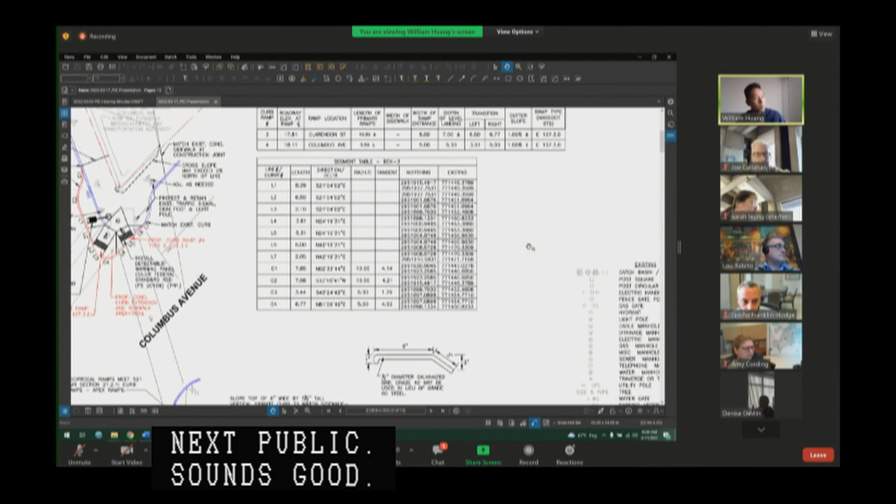Okay, so Freeman Street at Fields Corner Busway. Bear with me as I separate these two out. There we go. Okay, so this is the latest PIC plan. As a reminder, we are working on 3 of the 4 corners of the intersection. We are building a curb extension on the east side of the intersection, and we are redoing the curb ramps on the south and the west side. Here's a quick rendering of what it will look like.

Okay, so here's the curb extension that we're building out. We're splitting the apex ramp into 2 directional ramps. We're moving this post out of the path of travel way, and then shifting the lighting to expand the width of the path of travel as well.

On the other corner, we're adding a bollard here to prevent or deter vehicles, specifically SU units, from making that left turn onto the busway. The post that dictates an accessible path north of the intersection will be relocated just adjacent to this building. We're also adding a stop sign, a do not enter sign, and a no left turn sign on this approach.

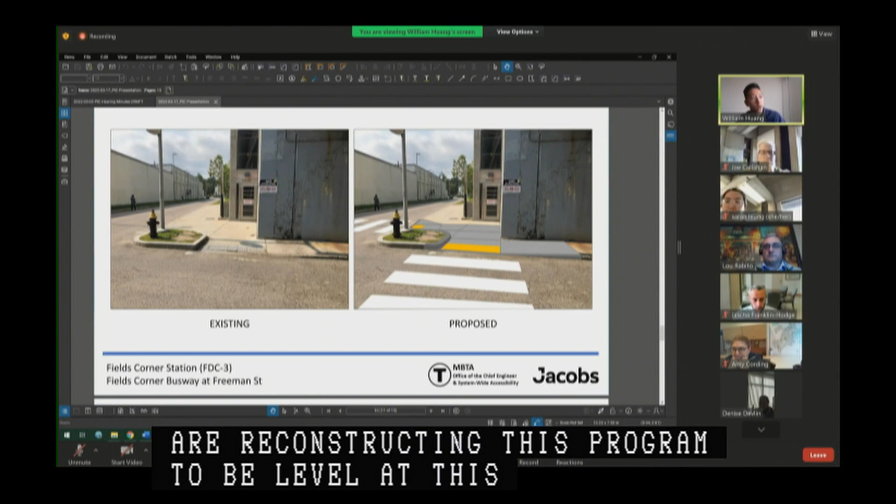Here we're reconstructing this curb ramp to be level at this portion. It's not shown in this diagram, but we're also adding, I believe, a no left turn sign here because of the concern that this island will be a tripping hazard.

So I'm just going to backtrack to the plans again. Comments received from the last meeting were to add a dimension line for the roadway width. So here we added 14 feet, and the curb extension is 6 feet from the existing curb line.

Another question was regarding whether there could be a signpost here as opposed to a bollard, and we explored that option. However, because of the width of the signs and how close it is to the curb line, we're afraid vehicles might interfere with the sign, and it might hit vehicles passing by. So we're going to have to stick with the bollard at the corner.

The other portion was adding a sign in this island, and we're proposing the R5 sign, which is the no left turn sign. Finally, the last comment was regarding raised crossings. We looked into raising the crossings; however, due to the nature of this project as an accessibility project, and impacts to drainage and buses traversing over raised crossings, we decided it would not be the best solution for this issue we're trying to solve.

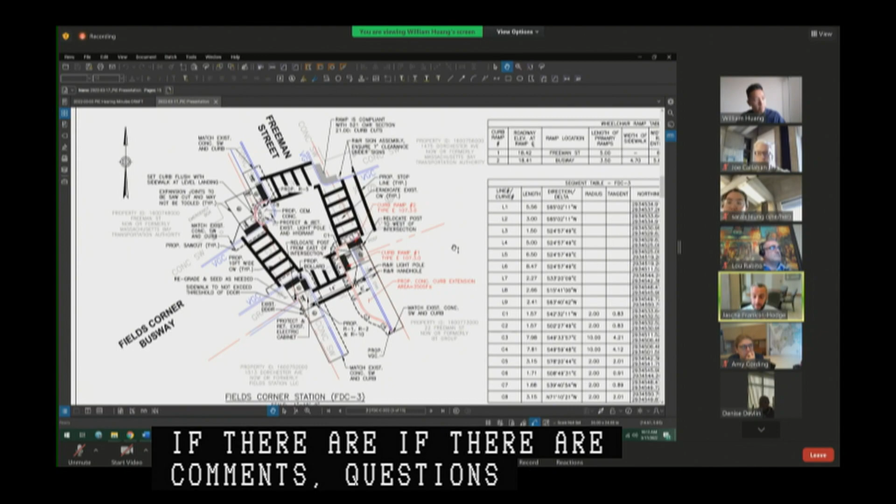Hearing none, any comments or questions from PIC staff or members of the public? Just hoping that the T will confirm that they will maintain that bollard if ever needed in the future.

Can we get an answer to that from somebody from the MBTA? We'll have to look into that. We're replacing in kind with compliant curb cuts, and the bollard was at the request of the city. Okay, we can discuss that offline, I guess.

Okay, Todd, I believe there's a comment in the chat box. Mr. Kirkpatrick asked if questions are entertained from the public. The answer is yes, and now if you are interested in speaking on this particular matter, now would be the time. For any matter that is either new business or a public hearing, there will be an opportunity for the public to speak, unless it is continued as we did with some of the earlier items. So we are open for comment on this matter at this time from the public.

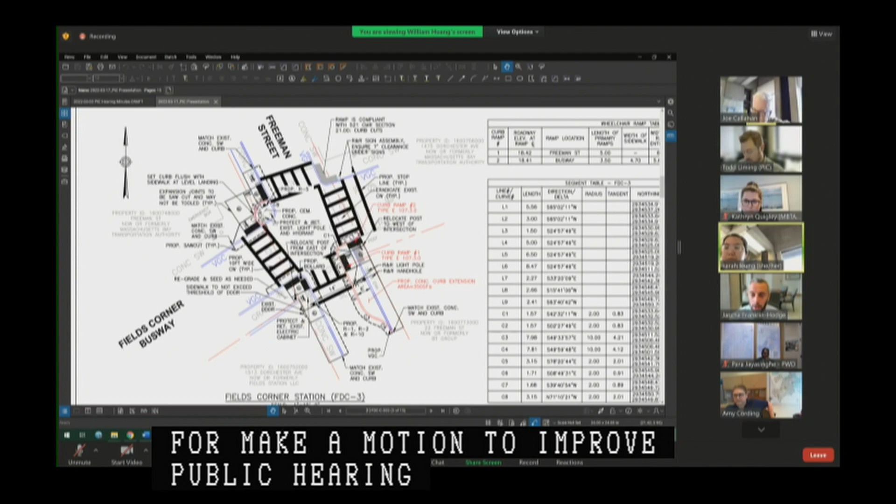All right, hearing no further comments, I hear a motion to approve public hearing number 4? I'll make a motion to approve public hearing item number 4 as read into record by the chair. Second. All in favor? Aye. Aye. Any opposed or abstain?

So moved. Moving on to public hearing number 5 on a petition by the Massachusetts Bay Transportation Authority for the making of specific repairs within the following roadways in Boston proper, consisting of curb realignment, sidewalk reconstruction, as well as new and relocated pedestrian ramps and traffic signal infrastructure. Clarendon Street at its intersection with Columbus Avenue at its intersection with Clarendon Street.

So it's new business from our March 3rd, 2022 hearing, and is shown on a plan entitled City of Boston Public Works Department, Engineering Division, Specific Repair Plan, Clarendon Street at Columbus Ave, South End, one sheet dated March 2022. Would the presenters please introduce themselves again and state their affiliations, provide a brief overview of the project, and specifically report back on any outstanding questions or revisions resulting from the new business hearing.

Thank you again, Lou Rabito, Jacobs Engineering Group, representing the MBTA. Kathryn Quigley, SWA, MBTA. And William Huang from Jacobs, representing MBTA.

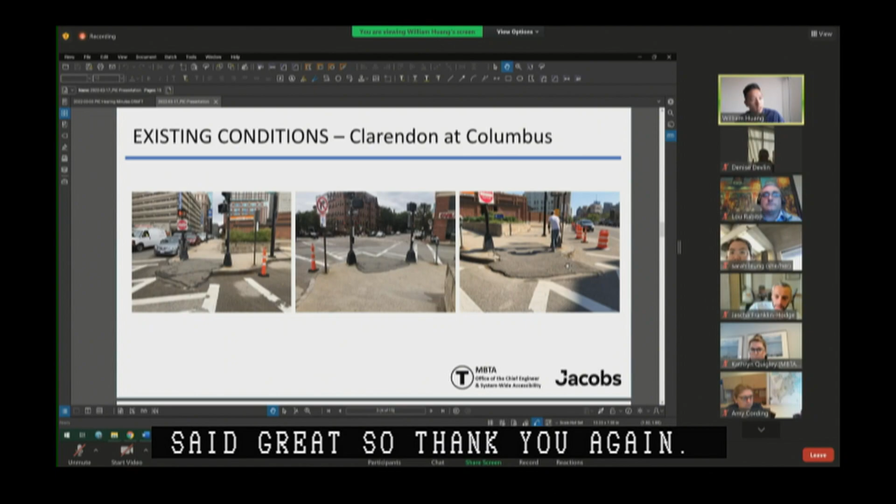Great, so thank you again. So for Clarendon and Columbus, just going to continue off the previous one. Here's an existing look at what Clarendon Columbus looks like. This is the north corner, northeast corner of the intersection.

Our proposal shown here is to split off the apex ramp into directional ramps as well as add a curb extension. This results in the removal of one parking meter. However, it increases the safety of this corner as well as the compliance with accessibility guidelines tremendously. In talking with BTD Signals, they would like a video detector after replacing the post, one of the pedestrian posts. So here is what the corner is proposed to look like. The detectable warning panels are red per Landmarks District requirements because this is in the South End Landmarks District.

So with this, I'm going to go back to the latest PIC plans. The comments received from the previous hearing were to confirm whether or not the reciprocal ramps were compliant, and they are compliant, and we have documentation of that if needed. The project will also confirm that MBTA handles snow removal from the subject corner. Yes, MBTA is coordinating snow removal at this location. Curb realignment should not negatively impact any future Columbus Ave bike plans, and we do not anticipate any impacts to future Columbus Ave bike plans. MassDOT is aware of the plans. I think that's it for all the comments.

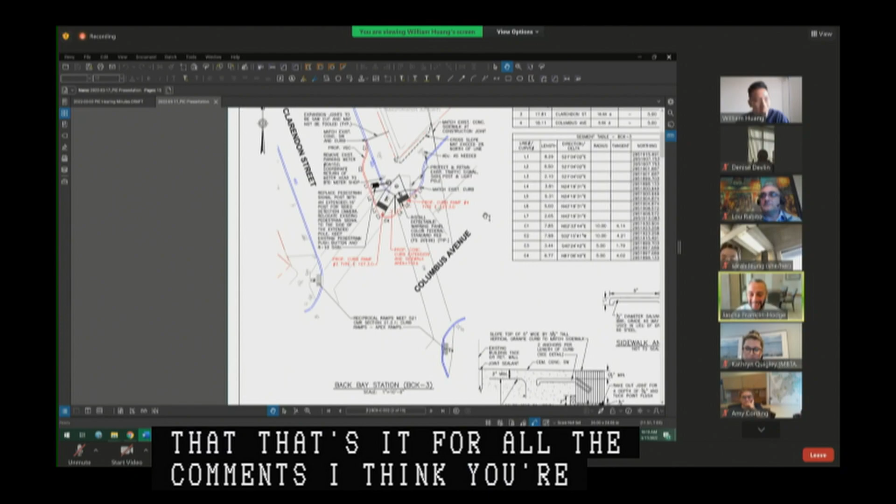Excellent, thank you, any further? Yep, thank you. Thank you very much. And any comments or questions from the commission? Any comments or questions from PIC staff or members of the public? No, though I will ask the public to use the raise hand feature at the bottom of their screen should they choose to or wish to add testimony to any particular hearing.

All right, do I hear a motion to approve public hearing number 5? Make a motion to approve a petition by the Massachusetts Bay Transportation Authority for the making of specific repairs in Clarendon Street and Columbus Ave, as read into the record by the chair. Second. All in favor? Aye. Aye. Any opposed or abstain? So moved. Excellent, thank you very much.

Moving on to our new business for the day. So our first order of new business.

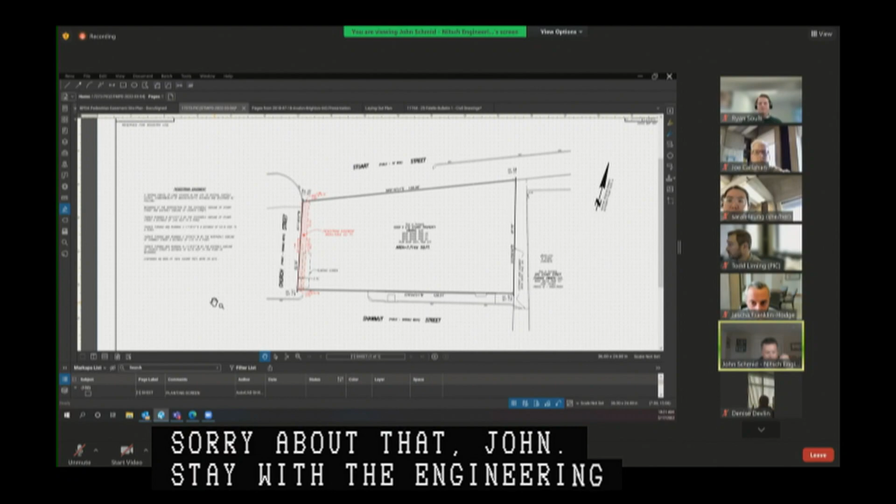Before you is the pedestrian easement plan. The pedestrian easement is approximately 3.75 feet wide and extends approximately 53 feet long, the length of the property line. The intent is to allow the public access up to the building front and improve the whole pedestrian experience within the plaza area itself. The plan has been reviewed and blessed by all the city agencies, including disabilities.

Excellent, thank you very much. Do we have any questions or comments from members of the commission? Any comments or questions from PIC staff or the public? None. All right, don't see any raised hands, so hearing no comments or questions...

Are you prepared to come back for a public hearing in 2 weeks on the 31st? We look forward to it. Excellent, we will see you in 2 weeks. All right, thank you. Thank you very much.

Moving on to new business item number 2, Nevins Hill Way at 25 Fidelis Way, Brighton, a layout approval on a joint petition by New Boston Ventures LLC, DBA 143 Washington LLC, Avalon Bay Communities Inc., DBA Brighton Avalon LLC, and the Boston Housing Authority. Will the petitioners please introduce themselves, their affiliations, and walk us through the proposal?

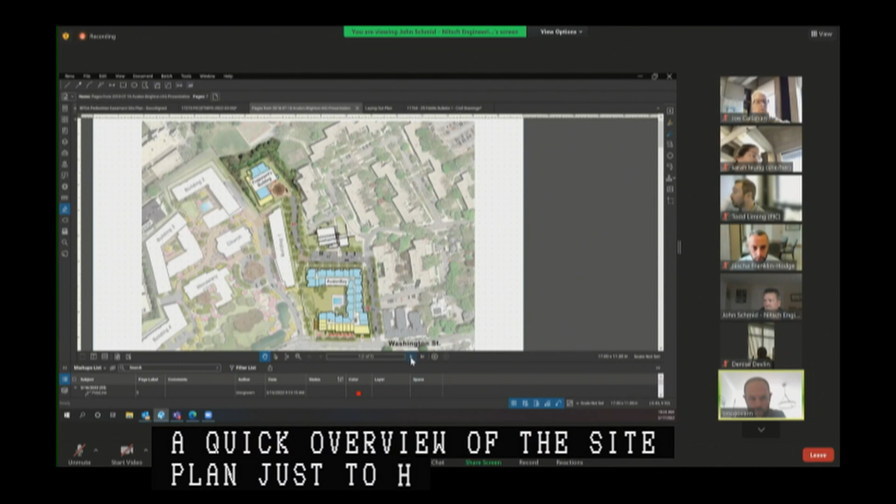So on the screen here, I'll just walk you through it. I thought it'd be helpful to do a quick overview of the site plan, just to help provide context for the private way. This project was originally permitted as 139 to 149 Washington Street, and it consisted of 2 separate buildings. You can see the one in the front is Avalon Bay, and then there's one in the rear up on a hill that's labeled Proponent's Building.

The front building is facing on Washington Street, and the garage to that building is accessible off Fidelis Way. The rear building is accessible by traveling up Fidelis Way and going across the Boston Housing Authority property, which is an existing parking lot that we're expanding, and then going up the drive aisle to our building. John, if you want to go to the next page.

This is just a color-coded version of that. So in orange is Fidelis Way, which is a private way. And in yellow is the property owned by the Boston Housing Authority, and the purple is where that property line is to our building and the drive aisle. If you want to go to the next one, John.

We have an easement agreement in place that's shown in red that allows for us to travel along Fidelis Way. You see the boundary of the easement stops where we make that left-hand turn into the parking lot area. The reason for this private way is that when we were seeking a building permit with ISD, we were given the address of 25 Fidelis Way for our rear building, because that is where the vehicular access comes off of on Fidelis Way.

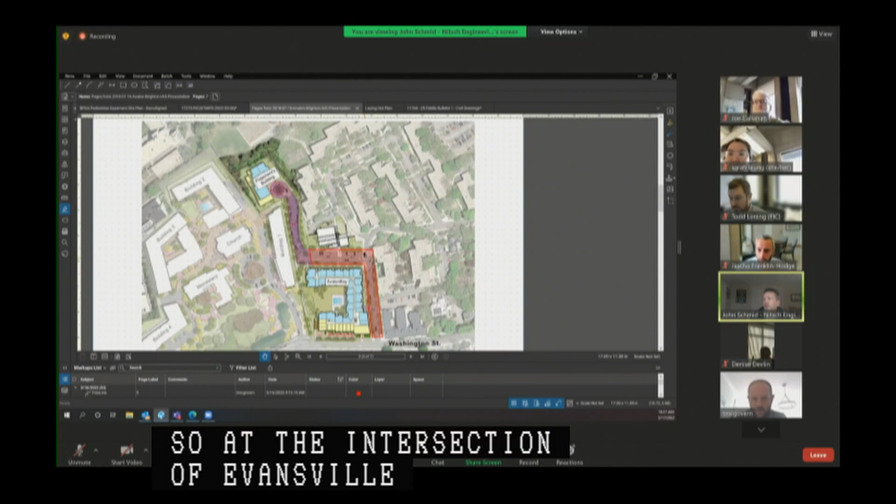So I'll turn it over to John to go through the plan in more detail. At the intersection of Nevins Hill Way we have a tabletop crosswalk. As vehicles come through this section, the right-of-way is approximately 61 feet wide. We're providing 6.5-foot concrete sidewalks on both sides of the roadway, 7-foot wide parallel parking along this section, and we're maintaining the 18-foot perpendicular parking spaces currently used by and dedicated to the Boston Housing Authority.

As we take this turn, we have a crosswalk so pedestrians can walk this way, and another crosswalk here. As we come up the hill at this bend, it provides a 25-foot wide traveled way, and then as we pull up to this section, we have a 21-foot wide travel way. On the left side we have a 6-foot wide concrete sidewalk, 7-foot wide parallel parking, a 21-foot path of travel, and a 7-foot wide parking area with a 5-foot wide sidewalk. At the top, we have a raised crosswalk so pedestrians walking up this side can cross the raised tabletop crosswalk, and from there go through the plaza into the building.

And here's the actual drawing. So we have the tabletop here, vehicles can come in, perpendicular parking dedicated to Boston Housing Authority, and parallel spaces down here. As we take this bend, we have this crosswalk, and as we come up towards the building itself, we have two-way travel with a 20-foot wide travel way, 7 feet of parallel parking on both sides, and a 5-foot sidewalk to the right and a 6-foot sidewalk to the left. The sidewalk here comes up to this point.

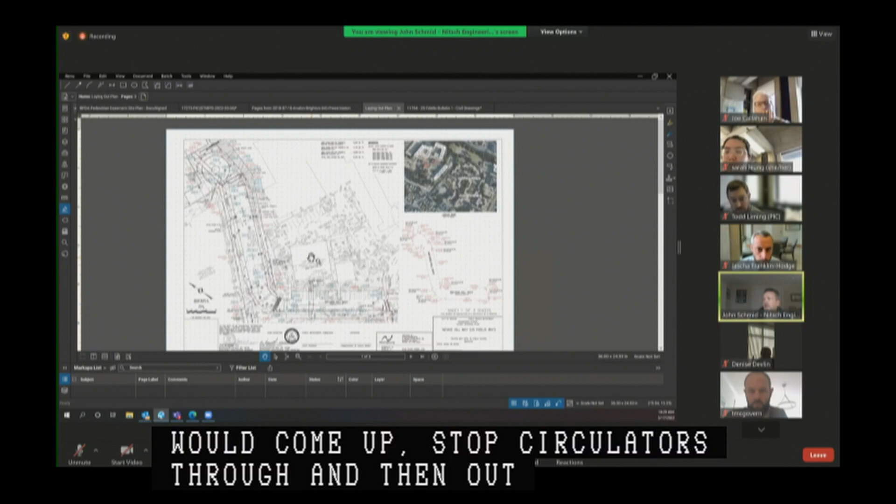I know that Sarah hasn't had an opportunity to review these in any great detail. So Sarah, any comments you'd like to share, we're available anytime to review them with you.

Great, thank you very much. Are there any questions, comments from members of the commission? Thank you, John, and thank you for the project update as well for this project.

Is there any feasibility on expanding the width of the sidewalks? I think 5 feet and 6, 6.5 feet are really at the minimum of our standards, and with the addition of possible signage it can get a little tight for the pedestrian path. So is there any opportunity to expand the sidewalks to our city standard of 7 feet?

Unfortunately, there is not. It is extremely tight up here, as you can see we're really fighting grade here. We actually end up with a small retaining curb to allow it to be functional. This is a private way, and the sidewalk itself will be concrete. There will be no tree pits and no obstructions within the sidewalk itself.

And down here, where we possibly have signage, we'd have bump outs that the signage would be allowed to be put on — for instance, we have a stop sign down here that's on the bump out itself. So we spent a lot of time trying to explore wider sidewalks, and it just wasn't feasible for this project without great cost to the project. Don, can you add a comment regarding the street lighting component of this equation?

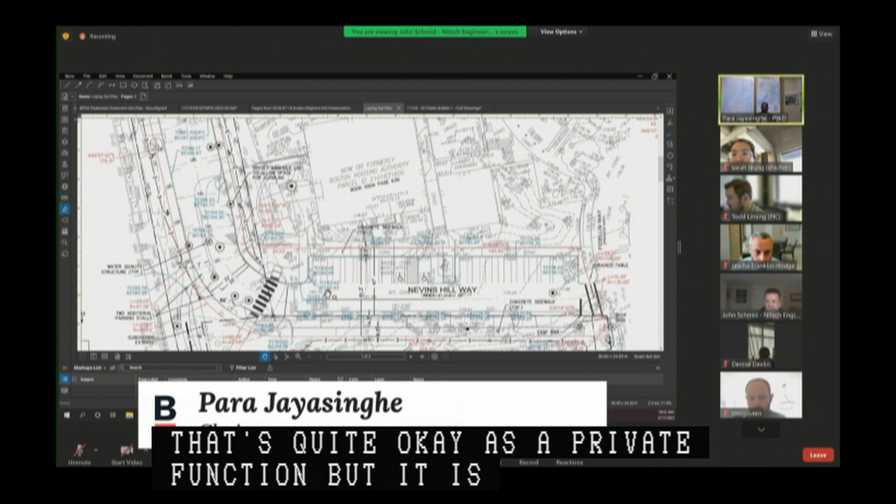Second point, John, as you know, the dedicated parking spots that are there - that's quite okay as a private way function, but it is not at all compatible with the public street. So I'm going to assume that all parties, including the Corporation Counsel or the Counsel for BHA, recognize that this street will not be in a future petition to be turned into a public street, as long as that is known at this point to all parties. You follow what I'm saying, right? Because this is unconventional, and it's only here because it's an existing condition. And with this constraint, we understand that this street would never be proposed as a public way.

So that little bit of language needs to be codified somewhere when we record these plans in the Registry of Deeds, okay? We'll include that language in the PIC order. Also, these guys will do snow removal, right? I don't think we're coming up here to plow around this thing, and particularly not to plow in the BHA parking spaces. So from Fidelis up to the end, you guys should take on the snow. Understood, private way will be the maintenance responsibility of the developer.

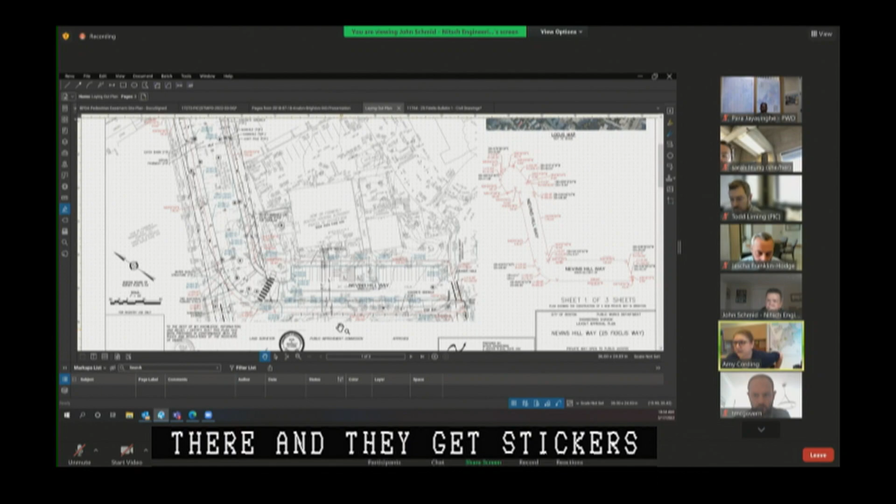Can I also say something? I don't know if you can hear me. Yes, hi, this is Dean Papadimitra, I'm counsel to the Boston Housing Authority. I do just want to mention about those parking spaces - this is a private way, so our understanding is that the general public is not allowed to park on those parking spaces, and only BHA residents can. So as a private way, this can be signed, but it is then enforced by whomever is the owner. So if there's people parking there, they get stickers, and there's a towing company, that's all organized privately. BTD will not enforce these parking spaces at all, so you can regulate them how you see fit, but you also then enforce them per your own regulation. That's correct, yeah, that is correct.

What I also like to note, and we'll have this on the final drawing, is that we will provide a street sign that says Nevins Way, Private Way, Nevins Hill Way, Private Way, so it's clear to anyone entering the parcel that it's a private way and not Boston Public Works responsibility.

Excellent, any additional questions or comments from the commission? I guess what level of vehicle can we turn around up here, like what would get stuck? So the fire department has reviewed this when we went through the ISD permitting process. For moving trucks, the idea would be your largest truck, a box truck would come in, park here, and then we could unload, and it would do the 3-point turn to get out. Smaller vehicles have the capacity to go around the circle.

John, not the private utilities like gas and electric, but the sewer lines and water lines, have you had conclusive conversations with Ms. Devlin's team to understand who owns them, who maintains them, all of that? Yeah, I received an email from Denise that she was okay with this. We have full site plan approval for both this project and the Avalon project before it, and there are cross easements between both parties for the utilities - water, sewer, storm, electrical, gas.

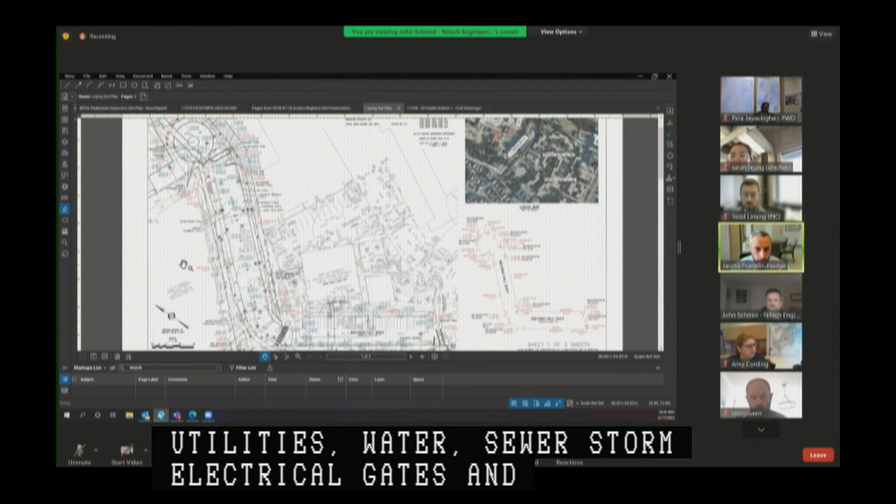Thank you. Any additional comments from members of the commission? Any comments from PIC staff or members of the public? No, none. Is 2 weeks enough time to address what you've heard today and come back for your public hearing? Yes, we believe we'll be ready. And Sarah, we're happy to reach out and communicate - if you have any additional comments you'd like to share, please do so, and we'll incorporate them as best we can. Excellent, thank you very much, we will see you on March 31st.

Moving on to new business 3: 3353 Washington Street, Green Street, Jamaica Plain, pedestrian easement on petition by 3353 Washington Development LLC. Would petitioners please introduce themselves, their affiliations, and what is proposed? Sure, good morning, my name is James Dowling from Howard Stein Hudson, we're project engineers. I'm also joined this morning by Maddy Blanchard from Howard Stein Hudson and by Hugh Miller from 3353 Washington Street LLC, who's the applicant.

We have prepared a couple of slides to give some project context before we get to the pedestrian easement. Next slide, please. The project's located at the intersection of Washington Street and Green Street in Jamaica Plain. Next slide please - a couple of viewports here from what you would see if you're on Washington Street. The project consists of 5 stories with 45 residential units, approximately 2,000 square feet of commercial ground floor space, with 24 off-street parking spaces. Next slide.

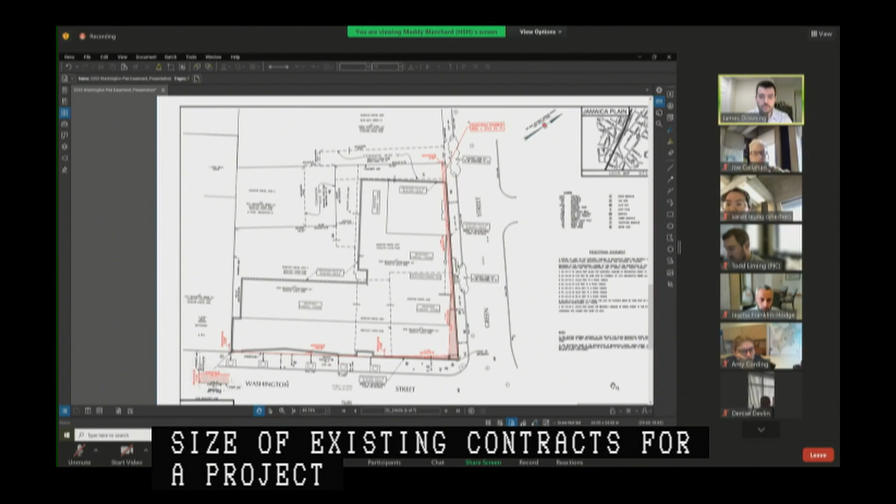Although a specific repair plan isn't required for the project, having reviewed the existing grades and elevations of the existing sidewalks, most, if not all, did not meet ADA compliance. Therefore, the applicant is willing to remove and reset all curbing and pour brand new sidewalks along Green Street and Washington Street. BPDA staff had also requested a reduction in the size of existing curb cuts for the project, which the applicant is also willing to do. And lastly, at the intersection of Green and Washington Street and Glen Road, there are 4 apex ramps that the applicant is also willing to remove and reconstruct to meet ADA compliance.

With that, happy to answer any questions that commission members or public may have.

To everything that you just said about the commitment for the ramps and all of that, while I know that can be done, potentially just by posting deposits and whatnot, when you break up those apex ramps, we've got a lot of stuff on these corners. So I think, if it's not on a specific repair plan, it probably still needs to be shown more than just through the permitting phase, the limits of your sidewalk reconstruction and how these ramps will be split.

Just to clarify, we're not splitting the apex ramps, we're just repouring them. In place? Correct. Okay. Is that okay with Sarah?

So that kind of brings me to the disabilities comments. I know we spoke to you during the comment period, but after internal discussion, I think the city has a lot of concern about pouring and replacing the apex ramps in place, given that this is a fairly large project of 45 units. There are going to be a lot of families here, as well as retail uses, and it's already an existing heavy pedestrian area and intersection. So I think more data on the cost and the constraints of replacing or splitting the ramps would be helpful for the Disabilities Commission to understand the constraints at this site.

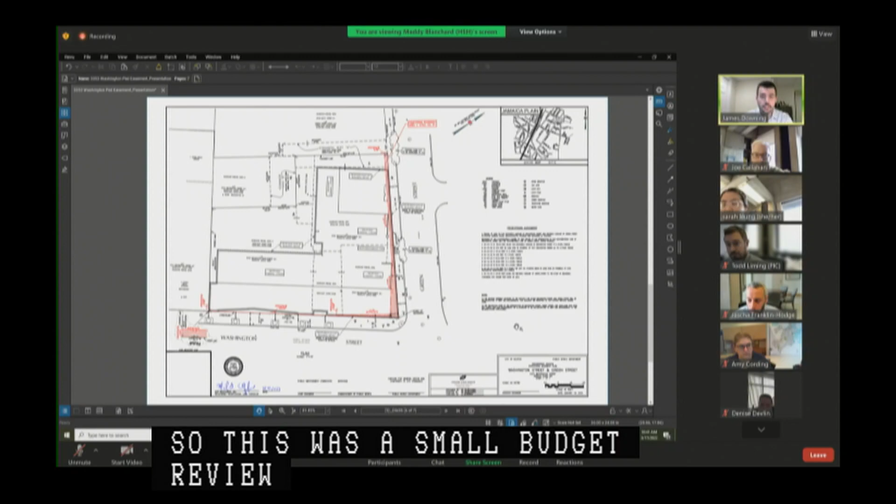Sure. So this was a small project review for the size of the building. We would have to relocate 6 signals out here, along with 2 existing bus stops, along with Boston Water and Sewer catch basin infrastructure and also fire control pull boxes. So it's a significant undertaking for a project of this size. But that said, we can certainly go and put some numbers to the costing for that, and we can meet again before we come back to PIC.

Yeah, that would be extremely helpful for our team to review, if we could just get a sketch and hard numbers to a cost estimate, as well as the overall value of the permit for the building, I think would be helpful for us to review as well, if that information is available. Okay, yep. I'm sure we can get that for you. Great, thank you.

Any additional questions from commissioners?

Any questions or comments from members of the public? I see none. Or any from PIC staff? Also none. All right, excellent.

Sorry James, are there any on-street or off-street parking associated with this project? There will be 24 off-street parking spaces provided within the building. Off-street, and the driveway is coming from? So at the top of the plan here, there's a shared parking driveway.

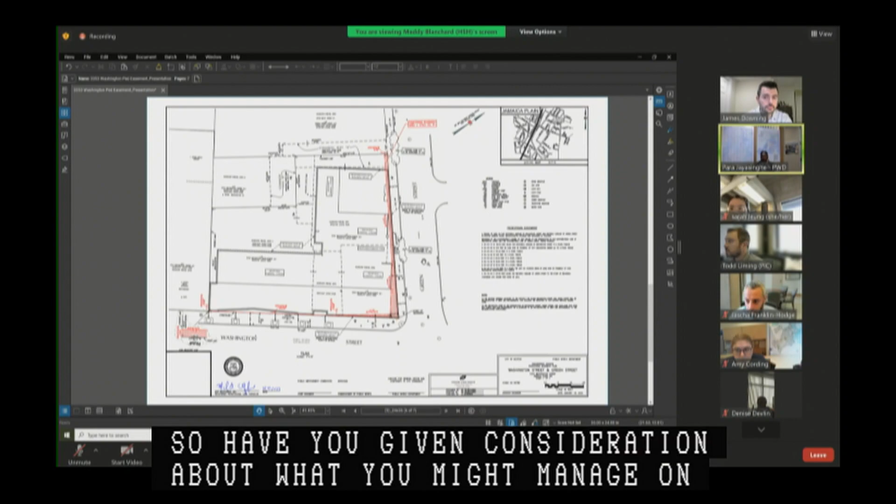So have you given consideration to how you might manage on-street parking? Because just up Green Street you've got the T station, and there's a huge desire line from a pedestrian perspective and movement of goods and services. I'm going to assume you've given it the appropriate level of thought to understand how to manage curbside regulations to service the ground floor commercial components you're anticipating.

They're reserved for police vehicles. There's a police station across the street. Amy, I didn't want to bring that up myself, so I was trying to insert it gently into the conversation so it doesn't become an awkward moment at some point in the future. Correct. Thank you.

I have a question about the driveway entrance at the top of the drawing. Currently there's a transition at the edge of that driveway from concrete to asphalt sidewalks. What is the planned final state once this is reconstructed and the driveway is rebuilt? Where will that line be between asphalt and concrete?

It'll be difficult for me to describe without showing you a plan. Right now it's a pretty large curb cut. We're going to potentially reduce that to 12 feet. Once we construct the curb return on the north side, there will be a section of probably at least one or two panels of concrete installed, and then it will transition back to HMA. Got it, okay.

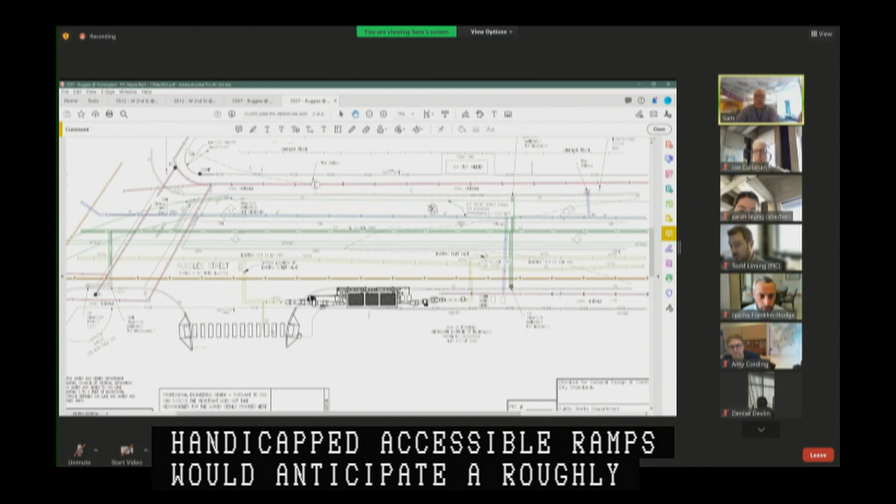As before you, you can see it's a 3-vault system with a pole-mounted regulator box and 2 vent poles, all of which will be replaced in the existing locations. In addition, National Grid is going to upgrade the existing sidewalk at the entrance to Wentworth Institute with the appropriate pedestrian and handicapped accessible ramps. We'd anticipate a roughly 8-week construction cycle if the commission were to grant us this, which would include the sidewalk and crosswalk restoration.

I can. Thank you very much. Any questions, comments from the commission? We just talked with these guys about this through us in Public Works.

We are looking into potentially a different design here to make this more of a raised crossing situation, but we would give them the design prior to their construction. So we're still talking about that, but we just discussed all this and Jeff's looking into it now.

Amy, forgive me, I wasn't part of this meeting on Friday. I was out, but I thought that was relative to some of the other locations. I wasn't aware of a raised structure on the Wentworth entrance.

We don't know that it's possible, right? Drainage and all this other stuff is involved. So we were going to look into that, because if there's not heroic measures required, having this be a continuous sidewalk is of benefit, particularly in this location, rather than having it appear like a street opening like this. So we want to go the extra mile to look into this, and we would only disrupt what you're doing out there if we found that it's doable without relocating anything major.

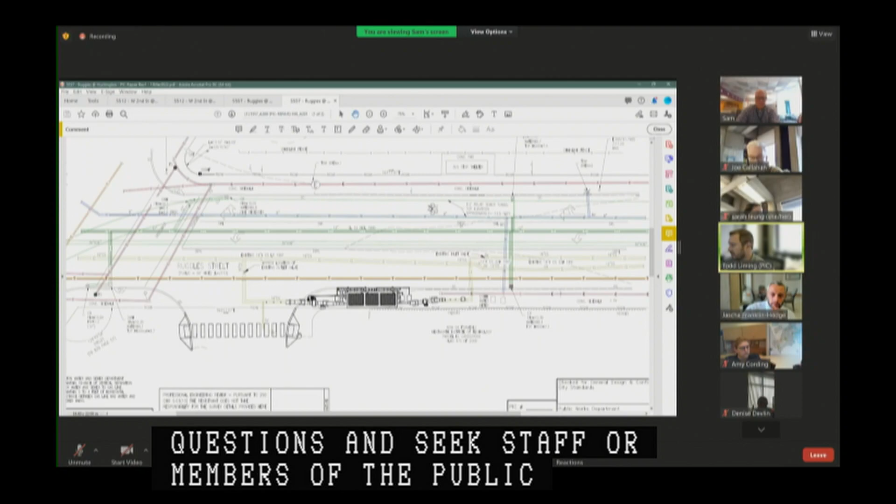Excellent. Are the proponents comfortable with a public hearing date in 2 weeks? Yes, we are. All right, we'll see you then. Thank you for that. Thank you.

Moving on to our next item of business, West 2nd Street. This is new business number 5, West 2nd Street, West 3rd Street, South Boston, specific repair, grant of location on set of petitions by National Grid. The presenters, please reintroduce themselves, their affiliations, and walk us through this project.

Sure. Good morning, Mr. Chair and members of the commission staff. Peter Nagel from National Grid, Customer and Community Management, joined by our regulator station engineer, Sam Wifo, and Steve Damiano from Power Engineering, who is our permitting consultant.

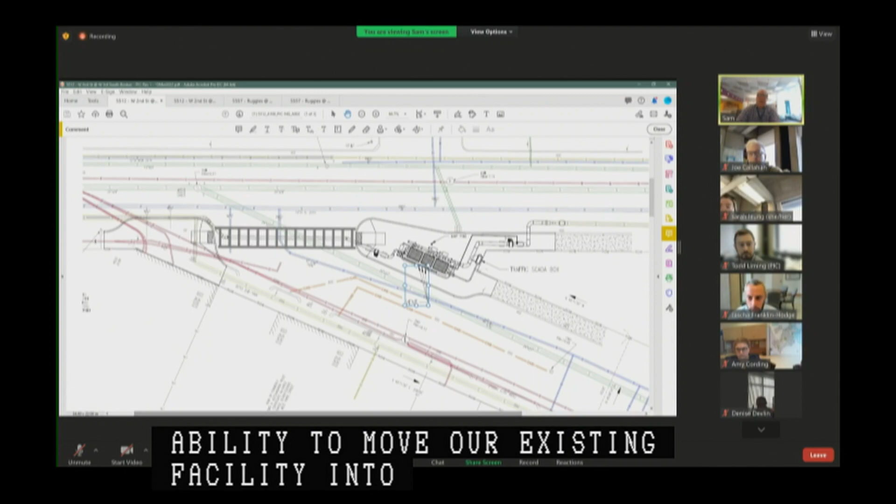This location, again, is a replacement in almost the exact same location, working fairly diligently with the commission staff and appropriate city agencies, envisioning a new extended curb line in this area on both sides of the street, proposed by the city, to facilitate pedestrian access and probably to improve vehicular flow in the area. It worked out well with our ability to move our existing facility into that newly created triangle, the pedestrian area at West 2nd, at West 3rd.

Again, we'd be looking to replace an existing 2-vault system with a safer 3-vault system, upgraded infrastructure. Obviously, this location would include a traffic SCADA box, which you can see at the bottom of the newly created triangle, and there would be vent posts along the newly created sidewalk in that area on West 2nd coming out.

In addition, there would be new pedestrian access and crosswalk in that area as well, above what would have been our existing regulator station, which will be removed, and any infrastructure within that would be taken out and then abandoned in place with a flowable fill material for any future access or future development above that. Again, we would also work to extend those sidewalks or crosswalks as well.

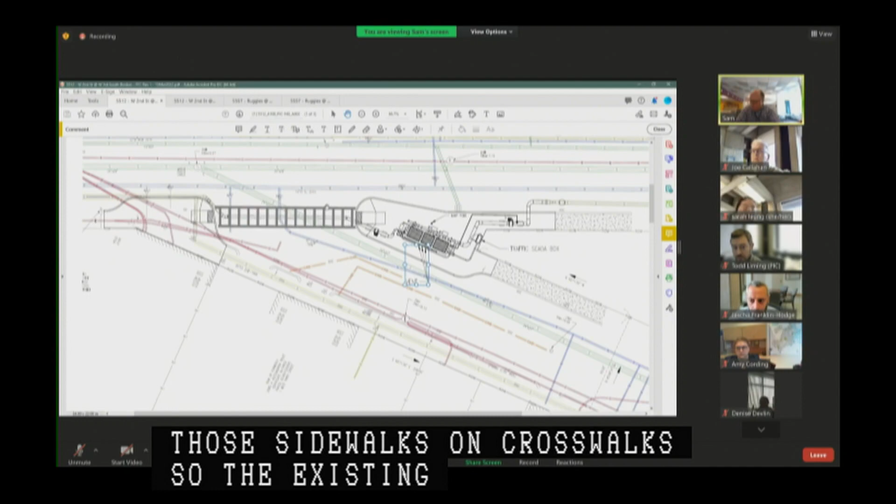This existing station serves about 5,300 customers and was originally constructed in 1960. This is a little bit more robust plan in terms of construction. We'd anticipate probably a 12-week replacement schedule on this facility, again contingent upon commission approval. I'll turn it over for any questions.

Sure, I'll start with one. There's an existing street light of a somewhat unusual and older design shown on your plan. Am I correct that this plan does not relocate or upgrade that street light, and has there been a conversation with the street lighting team? No, it's not touched, Commissioner.

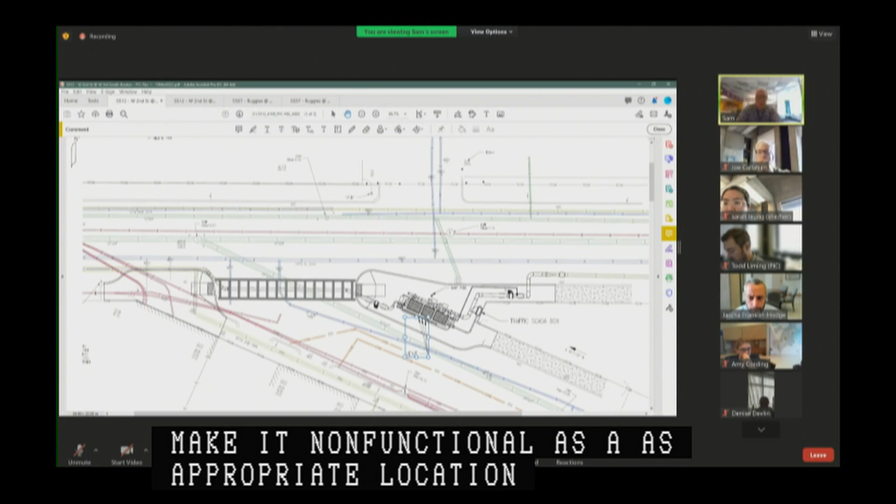So has that been reviewed and discussed at all with the street lighting team? I think given the work that's happening here, it may make sense to look at relocating or upgrading that. I'll also note that pole serves as a post for a street sign for West 2nd Street, and its new location relative to the extended curb line may make it non-functional as an appropriate location for a street name sign. I know in our comment period we did reach out to street lighting, but I can take another look at that, and our folks can take another look with the street lighting folks at the commission's direction.

Okay, that would be great, and include BTD in that conversation for the signage question. Yeah, we did get comment back from street lighting, but as Peter said, we can circle back and review the plan again with them. Okay. And if they move for a replacement of that pole, we can do that, provided it's acceptable with any applicable municipal agency. Yep.

Any additional questions? Go ahead. Can I clarify the clearance between the proposed vent locations and the curb line?

Yeah, right there. Just a clear dimension. So the vent poles will be at the edge of the curb. Where they are shown right now is not the right place. They'll be at the edge right here, along the edge.

It might be helpful to have updated plans for the public hearing, just to accurately show the locations of the vent lines, to make sure they're not an obstruction for the continuous path of travel along the edge of the vault. Absolutely. So from this, from the existing curb to the new curb is a 4-foot distance. So the vent poles will just be at the very edge here.

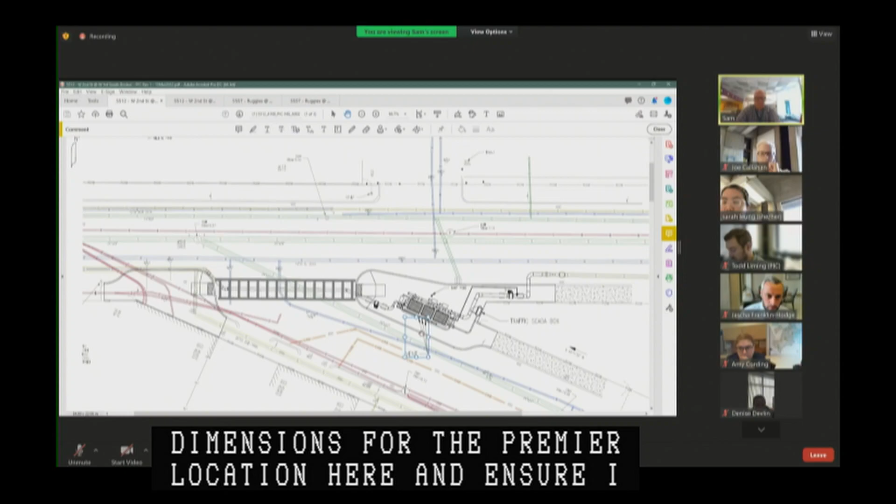And we'll put those dimensions on for the grant of location hearing. And Sarah, I should have mentioned that those doors will be consistent with our agreements that we've had with your agency. Great, fantastic, thank you.

So one thing here, I think this is just missing because we've already discussed it and Sam's definitely got it, is that we did some work to get a crosswalk that had moved from one side to the other side, back to the side. There's a bus stop that's across the street here. So where you see the catch basin on top of the lamp pole, there should be a ramp there.

And a reciprocal ramp on the other side and a crossing to that bus stop. We did some work to make it fit. That's why the curb comes in kind of at the angle that it does right now. So I know that Sam has that on a plan somewhere designed. I just don't think that it's gotten to this.

You seen Amy? Yep. So at our last meeting, you had moved it to over there, which we saw because we didn't want it in this parking cutout and the catch basin was a contributing factor.

So you moved it to the other side, but that doesn't really get to what we want because the bus stop is the desire line, which is over on the other side of this driveway that you see across the street. It's a pretty non-compliant situation out there, but we do see people, there you go. That's the one that we want, with the curb line that shows the angle coming in.

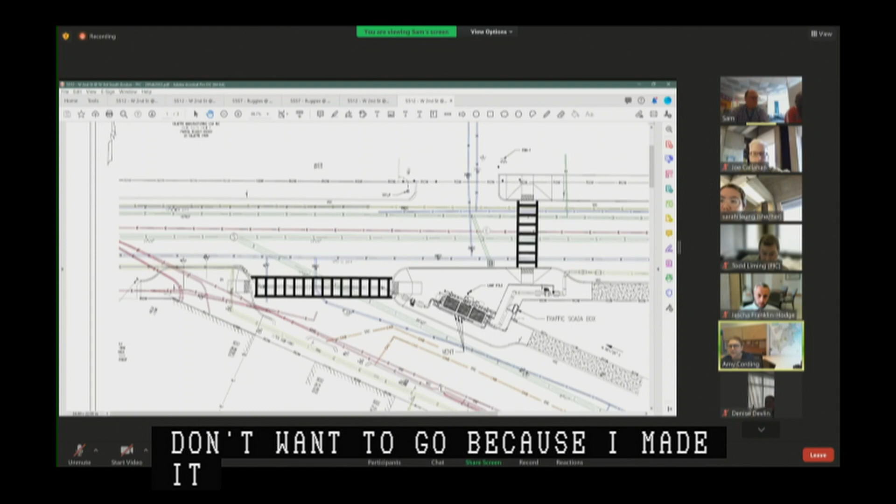I thought that was the point of you showing the angled curb line on your specific repair plan. And the point of that was to get to the catch basin and put this exactly as it is shown on this plan. Correct. Amy, the one other thing we discussed the other day was that if we put this crosswalk in - Sam, go back and show that, please.

That new crosswalk would be in a parking spot. So we just want to clarify that you want to go ahead with that, given previous discussions that there was a reluctance to have a crosswalk in a parking spot.

No, the reluctance was to not have the crosswalk come into the parking bump-in that you were showing there, so that it looked like you were coming into a parking spot, which is why the curb is no longer a bump-in. It comes in at a straight angle to that catch basin to make it clear what the curb angle is, and then that the parking would start at the other side of the crosswalk. So that's the genesis of this weird curb line, albeit unorthodox, so that you can leave the catch basin where it is, the ramp goes in on the other side of the catch basin, and we have a crosswalk in this location.

So Amy, if we put the pedestrian crossing back in that same location exactly as you have here, can we put a sign there that says, do not park beyond this point?

Yeah, I highly suggest no stopping, even on the other side of the street where you're bumping out the curb. Where you have vents on the curb line, I suggest no stopping there too, that would make a ton of sense.

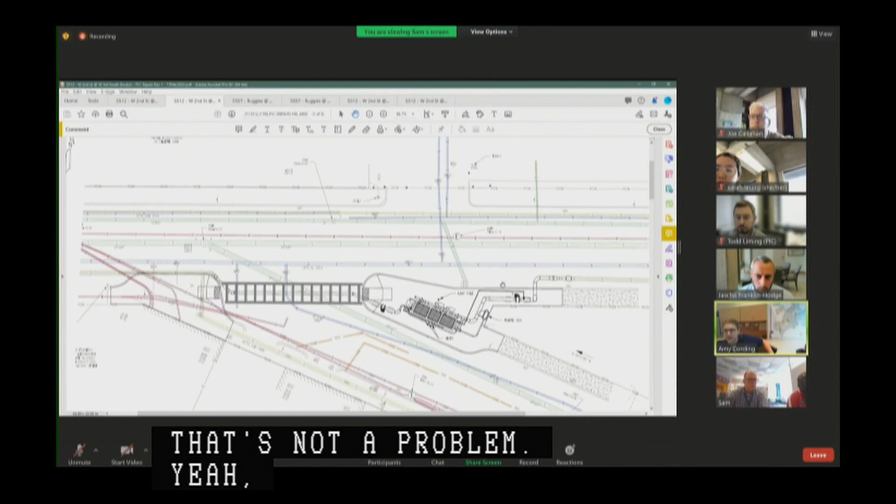Yeah, and there's probably some parking signage out there that needs to be relocated based on these curb modifications. So I think we can just go look at the entirety of this corner, because I think we'd start signage at a place that won't be appropriate, but it says no stopping anytime for a good portion of this. Okay, great.

Any additional comments or questions from the commission? Any comments or questions from PIC staff or members of the public?

Nope, just in an attempt to summarize what we've heard here: the curb lines are going to move to resemble approximately what is shown on the screen right now. The pedestrian crossing is going to be established approximately where that cursor is, and the lamp post currently in the middle of the sidewalk is going to be relocated to the curb line, as will the vent posts, to keep them out of the pedestrian path of travel. Plus the street signage, plus the street name.

Yes. The lamp with all of it that's currently there, all that will get moved out, and we will have new plans for the hearing. Correct, yes. And is two weeks enough time to address the things you've heard today? Yes. All right, well, we will see you again on the 31st. Thank you very much. Thank you.

All right, moving on to new business, item number 6, Blue Hill Avenue, Fabian Street, Dorchester, grant of location on a petition by Extenet Systems. Would the presenters please introduce themselves and walk us through what's being proposed?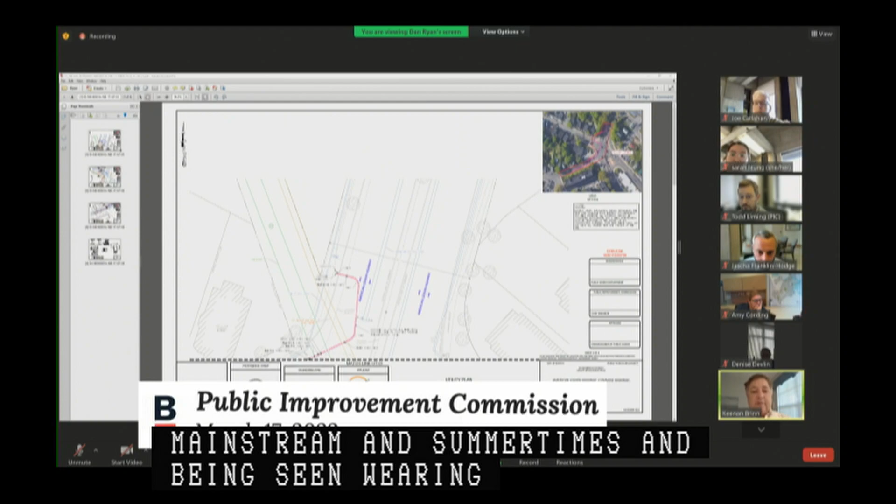Good morning, my name's Keenan Brien, I'm with NB&C. We're a consulting firm assisting Extenet in the placement of these fiber ducts throughout the city of Boston. The next six petitions all involve Extenet in the installation of these fiber ducts. Extenet, generally speaking, is a provider of wireless infrastructure, and in this case they're installing these fiber ducts in order to connect their small cell network throughout the city.

I'm also joined today by Dan Ryan, an engineer from NB&C. He's going to offer some technical expertise and help out with the mapping here. So I'll take these one at a time.

Obviously the first one involves a fiber run along Blue Hill Ave, running down to Fabyan Street. The entire length of the run is manhole to manhole. The run starts on Blue Hill Ave, right near Harvard Street, and runs about 2,269 feet down to Fabyan Street, where it turns for a short distance and terminates. It's a pretty straightforward run.

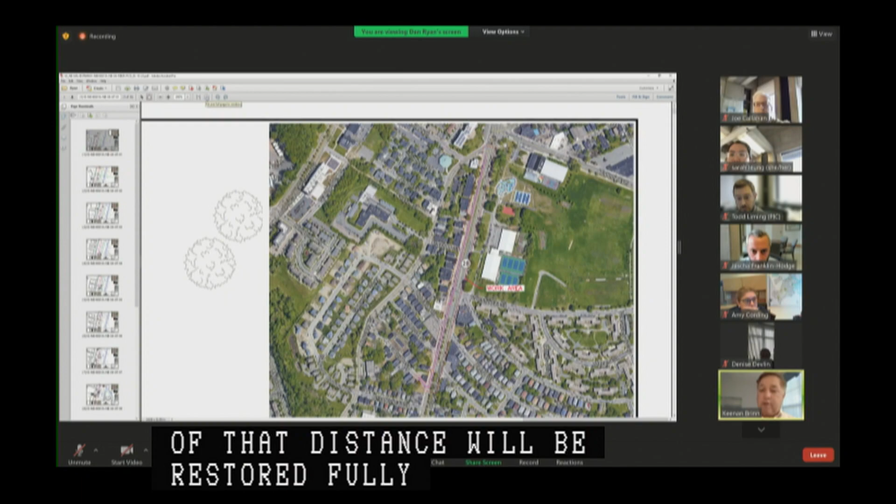Along the way there are two spurs that'll require fiber ducting to two telephone poles, a short distance, less than 50 feet, on Blue Hill Avenue. Other than that, it's a pretty straightforward run. We expect to cover about 150 feet a day, and each of that distance will be fully restored at the end of the day. Extenet also expects to install shadow ducts along the way as required by the city of Boston. I don't really have any other general comments other than that. If you have questions, I'd be happy to entertain those or have Dan weigh in.

Comments or questions from members of the commission?

The Disabilities Commission has a record of an on-street accessible parking space along or adjacent to this run. During construction, if that spot is affected by construction activities, please let our office know so we can coordinate relocating it. We can be reached at ada@boston.gov. We're familiar with your office, and prior to any construction we'll reach out to make sure any handicap parking spaces are relocated for the duration. I didn't want to get into the specifics, but I think we're aware of which ones have ADA issues, and I'll leave it to the construction company to get that covered before we start. Great, thank you.

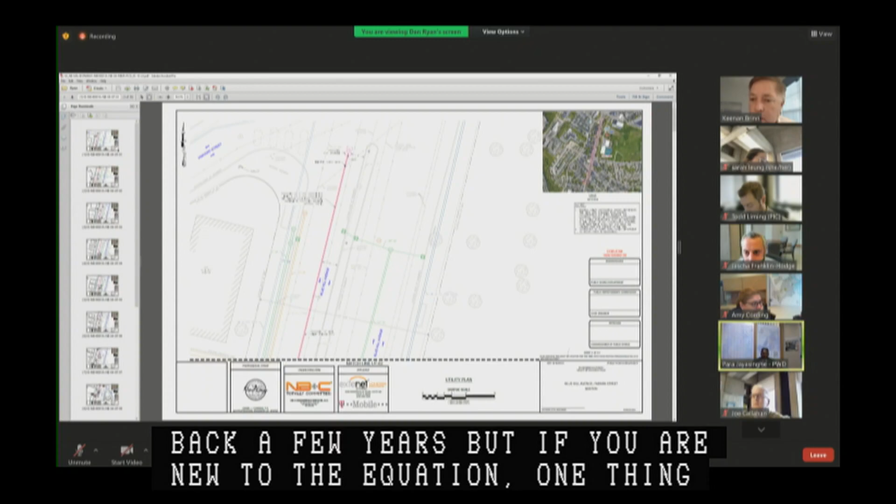Mr. Brien, I have a question for you. I recall, Keenan, whether you've been part of the Extenet team from the beginning, when Extenet started deploying their infrastructure within the downtown proper area. I'm not sure if I've seen you a few years back, but if you're new to the equation, one thing that would benefit the commission members is understanding your strategic master plan, if there is one, for extending your asset base to our neighborhood streets. Reason being, through the PIC process, once you get permission to install your infrastructure, it naturally results in our streets being cut.

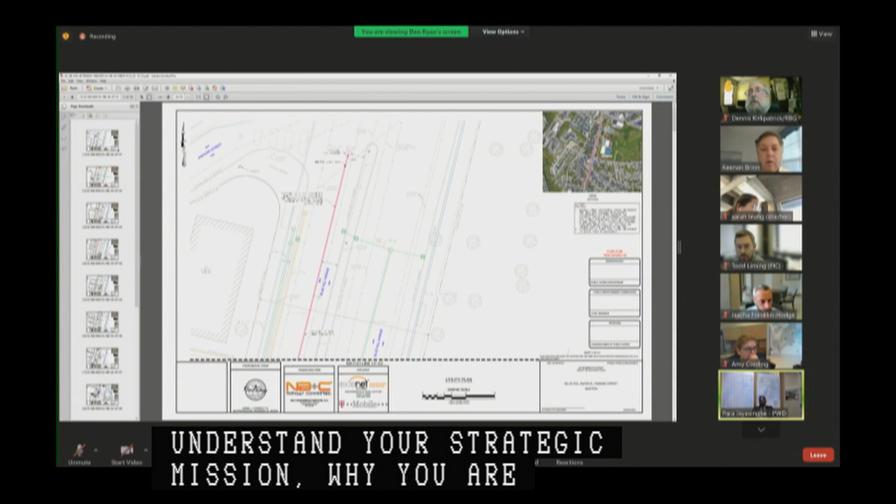Some of our neighborhood streets are not in the best condition, but not the worst either. Our cycle of rebuilding neighborhood streets takes a lesser priority, I don't want to say priority, but we don't cycle through residential streets as often as high traffic area streets. So my concern, Keenan, is that you'll be chopping up streets that, while not brand new, are beyond the 5-year moratorium but still significant cutting. It would be good for commission members to understand your strategic vision as you spread out into our neighborhoods, not just downtown proper, but West Roxbury, Hyde Park, Roslindale. Can you share that information so we know the extent to which our residential streets and even some major arterials are going to get chopped up?

Todd made us aware this question might come up, and we have a general statement prepared, but if we had to come back in a couple of weeks we might be able to provide something more concrete. Dan, would you like to give them a general overview of the plan for Extenet over the coming years, and where and when you think they'll be in some of these neighborhoods?

Thanks, Keenan. Hi, I'm Dan Ryan, engineering project manager at NB&C. I handle a lot of the background design work with Extenet. Just for context, they are building out a network of conduits for their communications, and their idea is to build as large a network as possible at this time because they work with all the different carriers—your T-Mobiles, AT&Ts, Verizons, anybody. They're putting conduits in the city of Boston streets now so that if any future work happens, or other carriers approach them later, they'll already have their backbone infrastructure in the ground through this project.

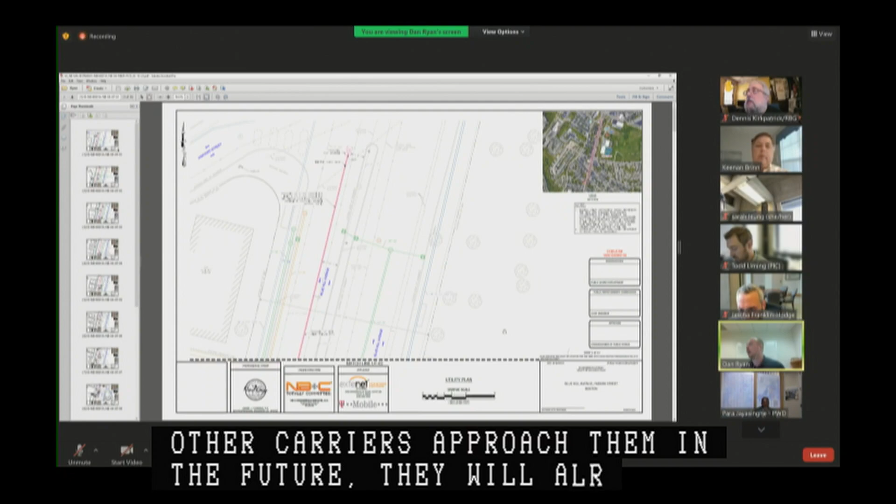The locations they're going to cover—I have a KMZ file. Can you guys see the Google Earth that's come up on the screen? Yes, we can. So the large scope of the whole project—right now I only have the underground areas up, and I'll show you each area. There are three major hubs within the city of Boston they're going to be looking at, and the first one is in this Hyde Park area, as you can see here, with Hyde Park Ave itself.

Anything where you see this highlighted green box is going to be an underground installation section that we are going to be trying to push through with the PIC staff in the hearings.

Long section of Hyde Park Ave is going to be one of the major areas. They will have smaller areas like down here. I believe this is River Street here. At West Street, there'll be some really small ones that we are hoping we can put through the admin process.

Same as this one here, but the major areas: Cummings Highway here, into Blue Hill Ave is a big stretch for them. At River Street, another decent stretch here on Blue Hill Ave. American Legion Highway here, another couple sections on Hyde Park Ave.

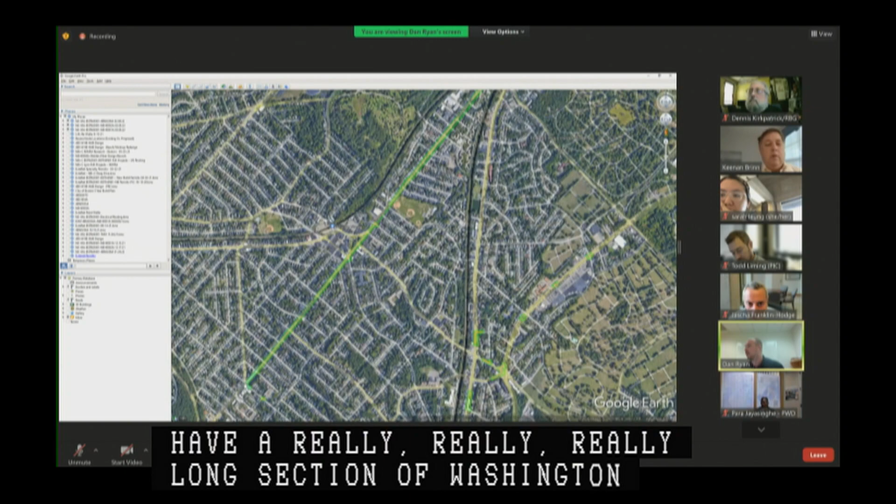A really long section of Washington Street is a major target of theirs. It starts all the way down from Beach Street and will go all the way up past the Arborway, up into South Street. That's a really long section, and to be honest, it's a section they didn't quite want to do. However, there really is no aerial infrastructure in order to hang any fiber in that area, so underground is really the only option to service that area.

And the other part of the city that we're going to be going into is East Boston, and that is up over by the airport. We did already have our hearing, you may remember, on the Maverick Square area. We talked about that one. We still remember all the comments.

We do remember that this section was recently redone, and you're very concerned about how we restore the pavement in that area to make sure it looks very clean. That's what they will continue to do. There is a section that is going to come off of that area, continuing on Sumner Street and head back up to Maverick Street to cover the area to the west there.

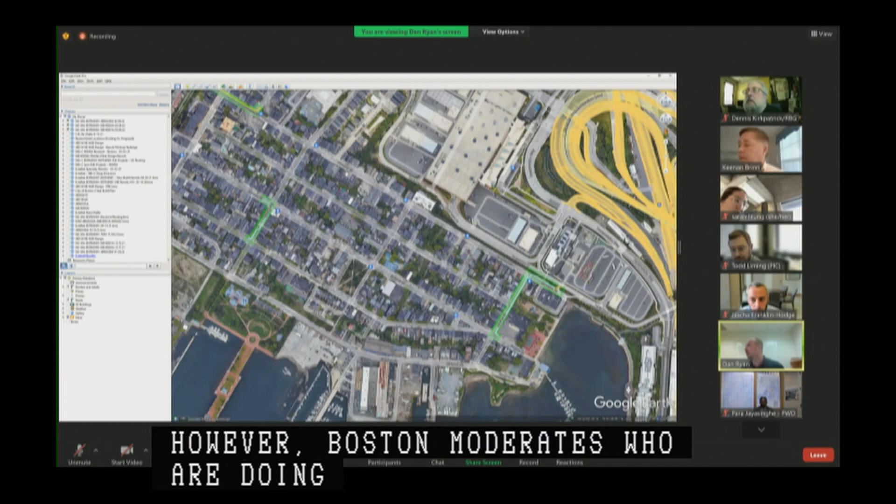And then it's really just a couple of random ones on Maverick Street, Cottage Street, which we are going to be working with Denise's team. We did have that one set up for a hearing, however Boston Water and Sewer are doing a future project in that area, so we are redoing our design for that area. The real large section up here is going to be on Meridian Street.

And then Saratoga Street, Bennington Street area is going to be rather long stretches as well. And like I said, the idea is so that they can have their conduits in the ground available to them, with enough fiber and dark fiber in those conduits so that for any future projects, they're not opening up the streets again. They're going to have the fiber there already, and at that point, for anything new in these areas, they'll just be able to pull laterals.

And just an editorial comment, and then I'll be quiet for the benefit of the fellow commission members. Something I would like you to visualize or synchronize with the way I am seeing things as a public works staff person: imagine a street where it is not brand spanking new, but it's not 100 years old—it's serviceable, 7 to 10 years.

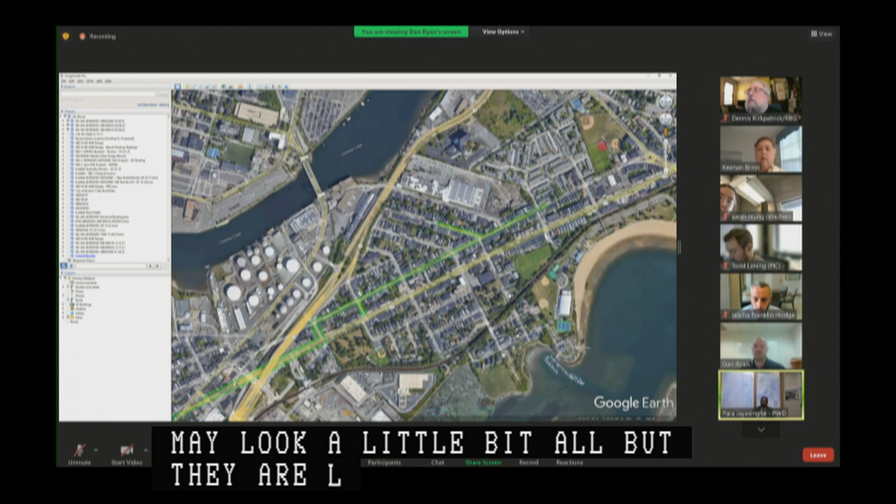However, the street does not have any current cuts. So the Washington Street corridor in Roslindale, West Roxbury is a good example where the street may look a little bit old, but there are no current cuts to the extent which you are going to cut it. So I would like you, Dan, to visualize from the collective users of that street how that very first cut is going to be, that is going to run parallel to your drive for a long stretch.

And that is our concern. I don't know what the solution is. There are many commission members who can come into the conversation. It is the impact of that first cut visually, how it looks, and it might stay for quite a few years. So that's our concern then.

As much as you are showing Google photographs or Google Maps, it will be good for you to show us the current conditions of these long runs, what it looks like, and what that first scar is, because that's what it's going to be. You will cut the street, you will patch it. There's going to be a visual difference in terms of the settlements and the width and the composition and the alignment. So it's how an asset looks like.

So we would appreciate your consideration. As the purveyors of these assets in the city, we owe the community a responsibility to ensure that these roads look like half-decent roads. Okay? Agreed. So, thank you.

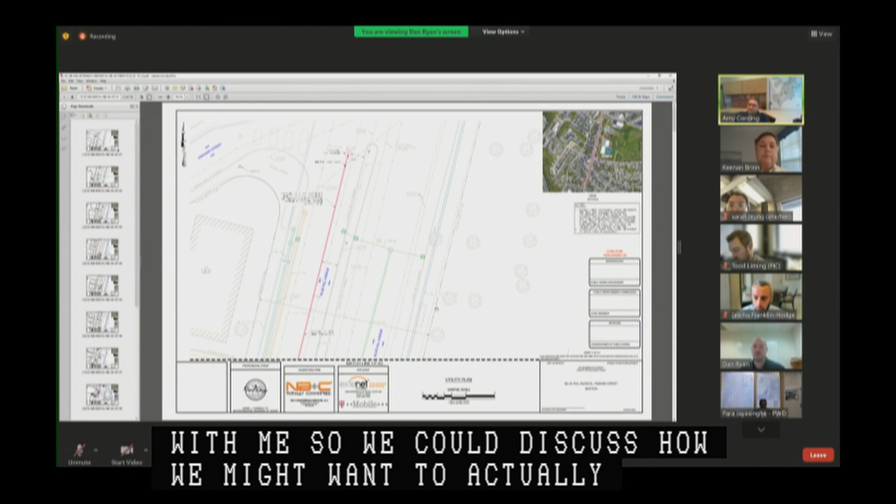From the transportation side, you guys are attacking some pretty interesting corridors that we struggle with on some of our own fiber connections. As you get ready to do this, I think if you could come in and sit down with BTD, we could discuss how we might want to populate the city shadow in some of these areas. A lot of the concern will be where handholes fall, making sure we're leaving them near signals, et cetera. Everything you showed on that future map covers areas that are issues for us as well, so if we can be part of these builds, that would be fantastic.

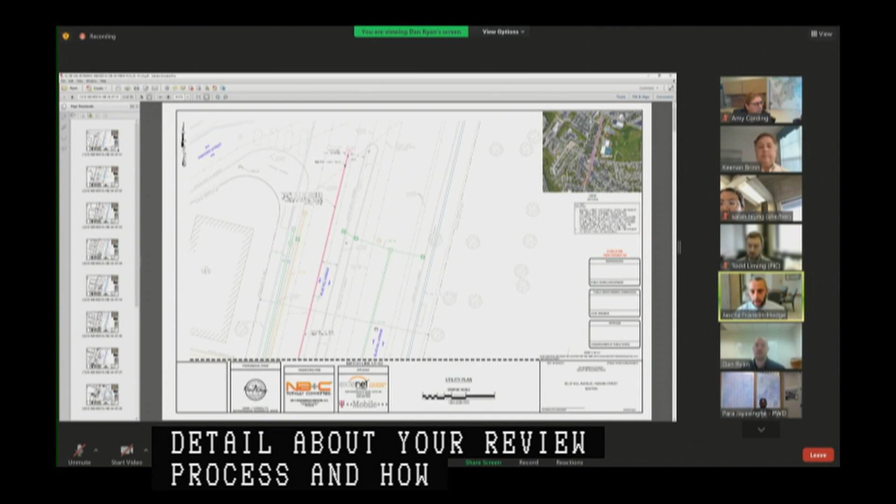Just to follow up a little bit, I think it would be helpful, speaking for myself and hopefully for other members of the commission, to understand the process by which ExteNet reviews alternatives to trenching and new conduit installation—in particular, opportunities for leasing existing conduit, city shadow conduit, or leasing access to existing fiber networks throughout the city, to facilitate the installations ExteNet is planning. We're sympathetic to the need for connectivity for the services you provide, but also, as others have stated, have concerns about the impacts on our roadway and a desire to avoid those impacts where avoidable. So now or at a future hearing, I'd love additional detail about your review process and what other options are considered before deciding to come to the PIC for permission to cut the street.

Sure, I can give you a brief overview. Our number one goal is always to go aerial if we can. If there's a way to put lines up on utility poles and run the fiber aerially, it's much cheaper construction-wise, so that's always the goal.

If that's not possible, especially in a city like Boston where there's not a lot of aerial infrastructure, there are some avenues to try to use existing conduit in the ground that isn't being used. We explored that route with Verizon—they were supposed to have a lot of shadow duct in the city, but when we did surveys, a lot of those conduits were actually crushed and unusable. That's what turned us away from that.

As far as using other fiber networks, the areas I showed you are mostly not the heart of Boston that we'll be serving with this fiber. In the heart of Boston, we're actually building out a network too—something like 380 small cells—and ExteNet is going to use Verizon fiber for those, which is why we won't be cutting in the heart of the city. So they did look into that avenue for that particular area. For the outskirts of the city, though, it's an area where they really weren't able to find any agreements, and it's an area where they'd like to have their own infrastructure in the ground for any future use.

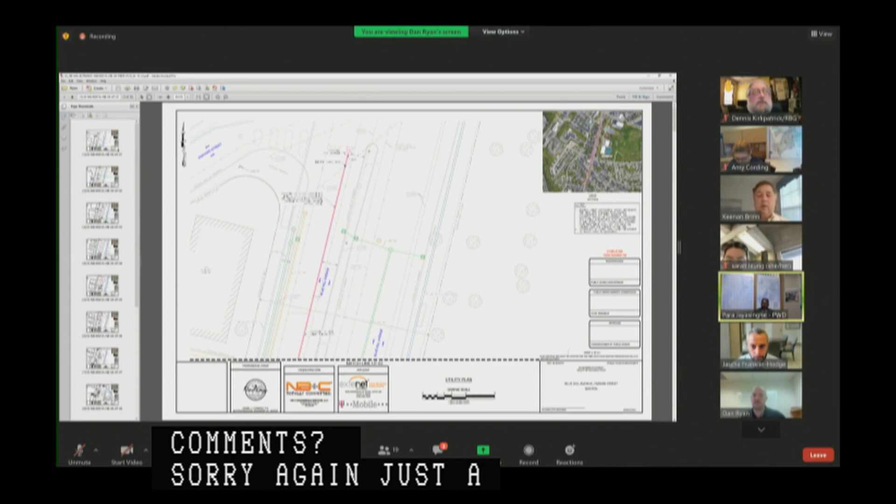Sorry, just a point of clarification, for amplification—when you take an aerial option, i.e. attaching your assets to a pole owned by Eversource and/or Verizon, do you have to pay them an annual or monthly attachment fee, or is it a one-time fee?

It's a one-time license fee, for the duration of occupying that space on the pole—not an annual thing, you just pay once. Is that correct? Correct. Okay.

And when you install conduits on the city street, the PIC gives you that space, you install your assets, and then you install additional assets beyond your needs to service others, right? You can rent or lease that space to private entities on an ongoing basis. There's no financial transaction between the city and you, but you're given that right through the city—is that correct? Correct, and they're also installing shadow duct for the city specifically. Thank you. Thank you, Dan.

Any additional comments or questions from members of the commission? Any comments or questions from PIC staff? No, although Mr. Kirkpatrick, with the public, would you like to speak on this one, or are you waiting for the West Roxbury petition, sir?

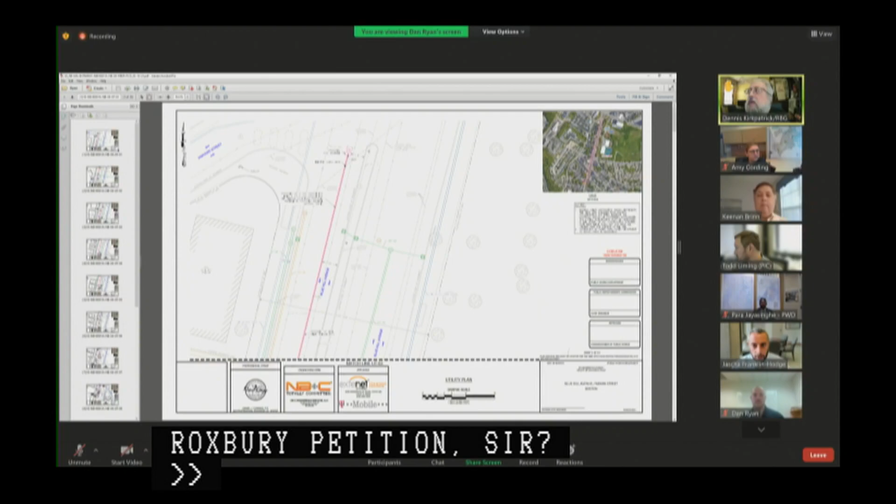Thank you, Mr. Chairman. Just a quick question. Based on your comments just now, are you asking Extenet to come back with more information, or are we going to continue with the agenda items as published? We expect to continue with the agenda items. This is a new business hearing, so there will not be a formal vote on this matter until 2 weeks from now at the earliest.

Thank you very much. We will go through with the additional agenda items. Thank you, sir. I'll defer until item 11. Thank you. All right, excellent. Thank you. Any additional questions or comments from members of the public or PIC staff? All right. No, I think we're all set.

Excellent. Are the proponents prepared to come back in 2 weeks for a public hearing? Yes. All right, excellent. We will see you then for that.

And moving on to our next order item of new business, let me make sure I'm in the right place. Here, new business 7, Cummins Highway, Favre Street, Brockton Street, Woodhaven Street, Dorchester, granted location on a petition by Extenet Systems, Inc. The petitioners, please reintroduce yourselves, your affiliations, and walk us through the proposal.

Be happy to. Again, I'm here on behalf of Extenet. My name is Keenan Brion. I'm here with Dan Ryan, who's supporting us with some technical expertise, and I'll give you a quick overview of the project itself.

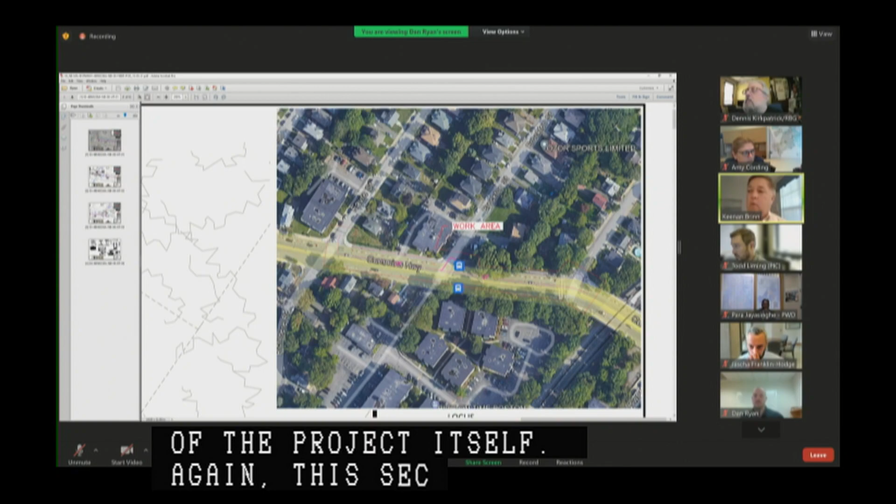Again, this second project obviously involves a fiber duct as well. This particular one is a little shorter than the previous one. It starts on Favre Street and makes a left-hand turn onto Cummins Highway and continues down Cummins Highway for the bulk of the run, which is 833 feet. It actually terminates just beyond Cummins Highway.

Along the way, there are 2 spurs—fiber ducts that will peel off from Cummins Highway. One would travel just onto the beginning of Brockton Street, and the second one travels just slightly down Woodhaven Street, and then continues on beyond there, finally terminating on Cummins Highway just about the intersection of Woodhaven Street. Again, 833 feet for this one.

We would anticipate that we'd be able to cover about 150 feet a day and restore each section along the way. And again, we expect that we'll be placing shadow ducts as required by the city along this run. Those are the particulars. If you have any specific questions, we'd be happy to answer.

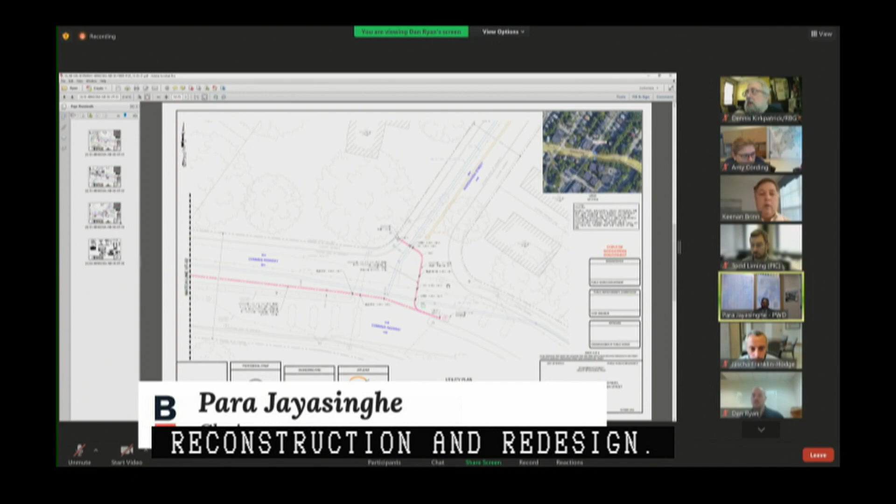Members of the commission? Sorry, Chief. Keenan, I believe I stand to be corrected—this segment of Cummins Highway is under consideration for reconstruction and redesign. The relevant part is the current location of the sidewalks might be extended. So what I'm concerned about is that the location of your duct bank may be in conflict with a street reconstruction project in terms of the vertical clearances needed for lights and all of that good stuff.

So Todd, could you please connect Mr. Brinn with Jeffrey to make sure that the two projects are not going to be on top of each other? Certainly.

Keenan, the road is getting a road diet. The new edgestone line is going to be somewhere else. The median is coming out, so it's a complete reconfiguration of where the utilities are. Last thing I want is for you to spend money—and this isn't my position, it's the department's position—if you need to move because of this work, you will move at your expense, and it will be an awkward moment.

Do you know when this is planned, or is there a plan in place for it? Absolutely. We hope to hit construction before the year is out, so it's very mature in terms of where the curb lines are. Mr. Liming will give you guidance as to who to connect with in the public works team. Okay, that's the Cummins Highway segment part of it.

Any additional questions or comments from members of the commission?

Questions or comments from PIC staff or members of the public? No, we're all set on this one.

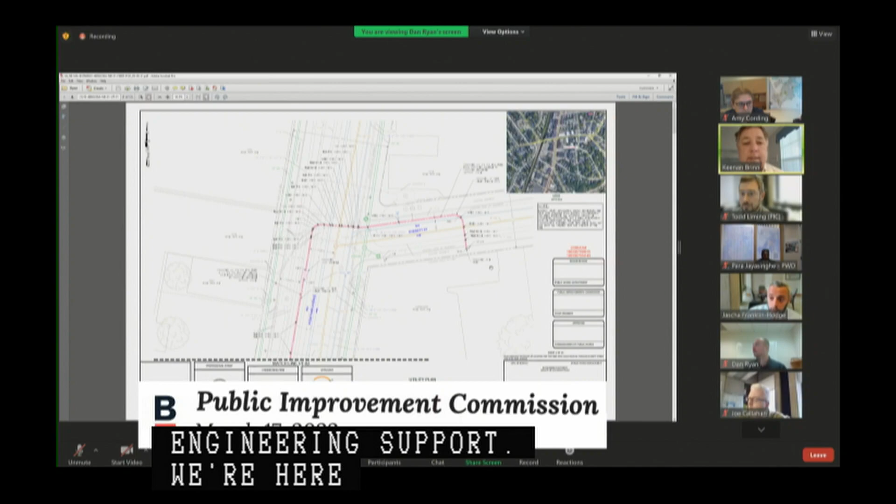Be happy to. Again, Keenan Brinn, Extenet Systems. I'm here with Dan Ryan, who's providing engineering support. We're here to discuss installation of a fiber duct in the city streets of Boston. This one here is a more lengthy run, 2,064 linear feet. It starts on Everett Street, comes out, turns left onto Hyde Park Avenue, and largely proceeds down Hyde Park Avenue for the duration. Along the way there are a couple of spurs that connect to light poles, one halfway down, and a second spur at the intersection of Dana Street.

If you look closely, there are also a couple of MWRA crossings. We've been in contact with the MWRA and have permits to do the crossings. The fiber line will continue down Hyde Park Avenue and terminate just after Factory Street. Like the previous ones, we expect somewhere in the vicinity of 150 linear feet per day in construction, and we'll try to abide by city requirements for shadow ducting. Largely a straightforward shot here. If you have any questions, we'd be happy to entertain them.

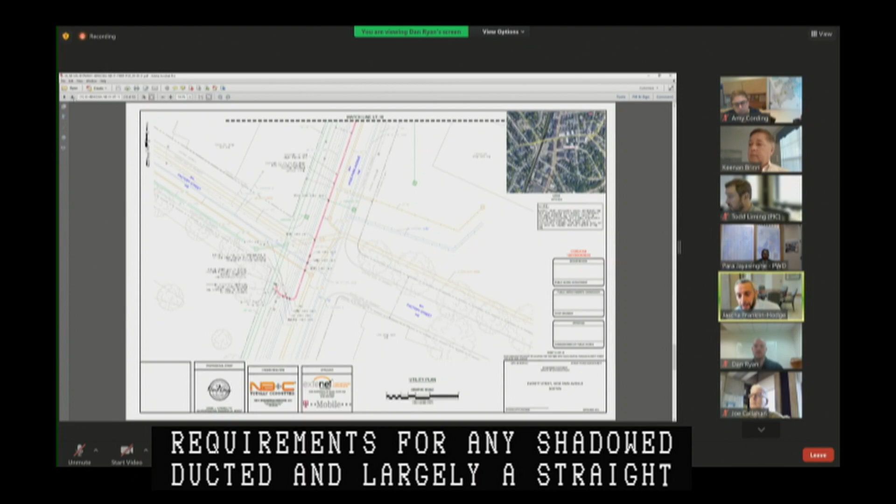So this is another location where we may have potential conflict with city projects. There is a resurfacing project planned for this coming construction season along Hyde Park Avenue. I think Todd Liming can connect you with our construction team to talk through what that timing and sequencing looks like. But we do not want to see this street trenched immediately after it's resurfaced, so we'll need to figure out a way to coordinate those things. Todd will get back to us on that.

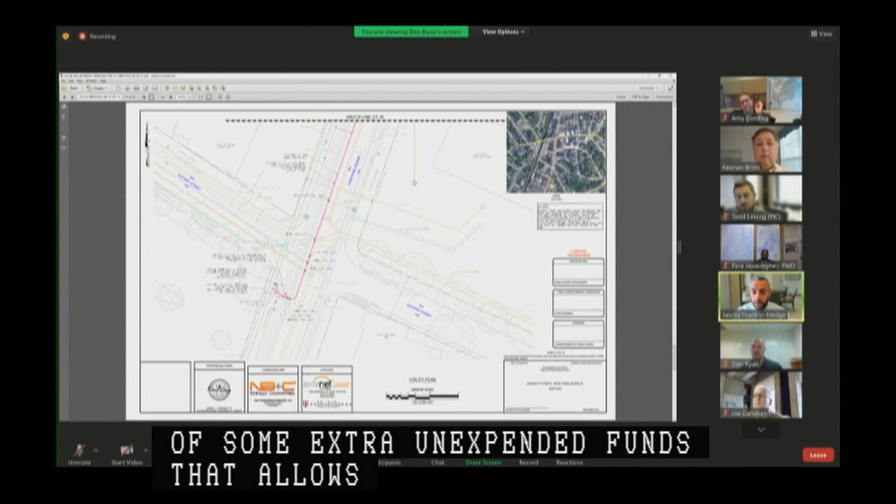Is there some way we could find out, rather than on this call, what streets might be affected? We certainly can reach out by email to the different department agencies, but just trying to find out in advance what might be happening. The city does have a map of its planned capital improvements on the website, and PIC staff can get you a link to that. I'll say it's our best effort at conveying what we intend to do. In this particular case, you wouldn't find Hyde Park Ave on there because it was a relatively recent decision based on availability of some extra unexpended funds. So we don't always know, but Cummins Highway, for example, has been noted, with quite a bit of information online about the progress of that project. We can get you access to that capital map, and we'd encourage you to use that in your future planning. Oh, absolutely, yeah.

Now, do you know for a fact that this section of Hyde Park Ave is being repaved, or is it the whole stretch? I believe it is this southern section of Hyde Park Ave, or at least there is some overlap. I don't know the exact extent of the repaving, so that conversation with the Public Works construction team should be informative. Okay, make a note of that.

Keenan, in addition to the comments made by the chief, points you should be mindful of: if you're new to this, on major arterials such as this, your trench line is going to cut through specialized crosswalks, traffic signal loops, conduit, and it's incumbent upon your contractor to fix those rather than just filling a trench. If you want to know what I'm saying, just drive up and down Hyde Park Ave and see the abundance of cuts that haven't been properly restored, including specialized crosswalks. On these major corridors, the city has made millions of dollars of investments, and we want to protect those investments in terms of operational capacity, capabilities, and use.

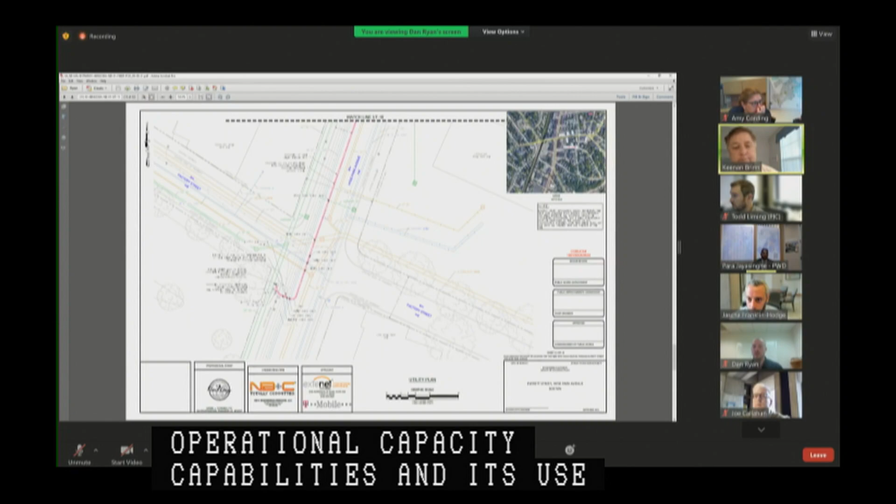Yeah, I mean, I understand your concern. Thank you, Keenan. Again, if we could somehow coordinate and get in here before the paving happens, that would be ideal for both parties.

Any additional questions or comments from the commissioners? Any additional questions or comments from PIC staff or members of the public? No, we're all set on this.

Would the petitioners like to be placed back on the agenda in 2 weeks? Yes, we would, please. All right, we'll see you then on this matter.

Moving on to new business item number 9, American Legion Highway, Canterbury Street, Cummins Highway, West Roxbury, granted location on a petition by Extenet Systems Incorporated. Would the petitioners please reintroduce themselves and go over what is being proposed?

Yes, thank you again. Keenan Brinn here on behalf of Extenet Systems. I'm joined by Dan Ryan, who's providing engineering support for installation of a fiber duct bank in the city of Boston. This particular duct fiber run is relatively short, 523 feet. It starts on American Legion Highway and continues through an intersection with Cummins Highway, then proceeds down Canterbury Street for the bulk of the run. There's also an MWRA crossing associated with this, which we have a permit for.

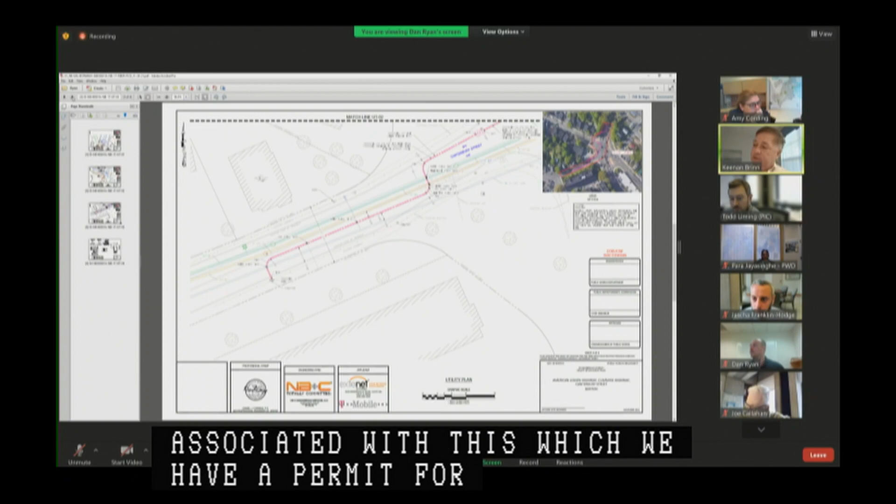I don't envision any other particular issues with this one, but certainly we'll pay attention to any handicapped issues that may arise prior to construction. We expect that we can cover about 150 feet per day like the other ones, and we'll restore that on a daily basis. And again, the shadow ducting will be installed as required by the city of Boston. I'd be happy to take any questions you have for this particular fiber run.

Keenan, do you know whether you will be the first one cutting up this intersection? Or are you aware, do you have staff doing a physical inspection of what the roadway asset looks like? Or is it just straightforward design based on Google Maps or survey information you get? Do you have a sense of whether this intersection has been cut up, whether you'll be the 10th cut, or whether you'll be the first cut?

Yeah, I've actually only seen it from Google Earth, so I can't specifically say that it's been cut or not at this point. Is that something you'd like us to determine prior to the next meeting?

Yes, I think, Keenan, it will be good for you to get a sense of the intrusion which you are causing. Again, we want to balance this conversation. We want to make sure you have the capacity to follow your business model, but there has to be some acknowledgement on your part as to the possible restoration that might be needed to support your first cut versus the 10th cut.

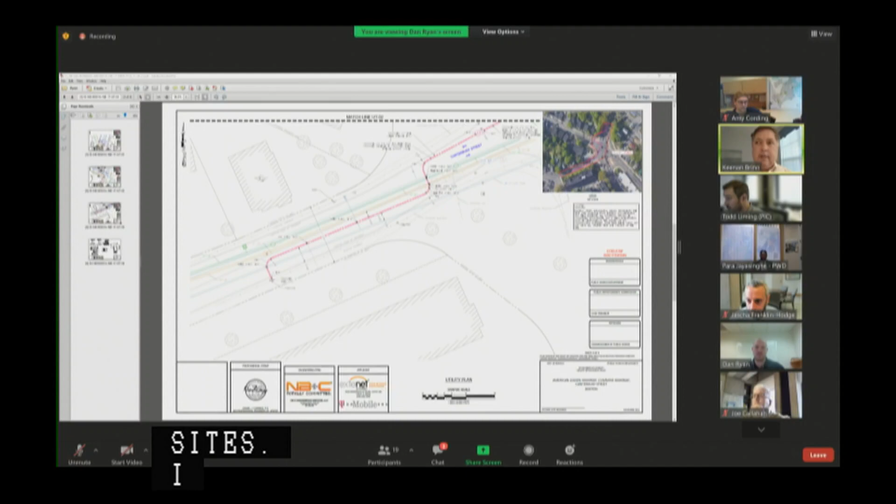Yeah, let me just ask Dan. Dan, I know we have certainly people on the ground at these sites. Is that something we're mindful of in terms of choosing a route, or is the condition of the road kind of secondary?

The condition of the road is something we'll have to take into account after we choose our design route, the reason being the design route is based on the need of the communications in the area. We do certainly take a look at the road condition. One thing we are not privy to is whether a street is guaranteed street, meaning it's obviously been paved over within the last 5 years, so we understand how those work. What we do not know is if it was paved over 7 years ago, whether we'll be the first ones to make that cut in the new pavement, or if somebody else has done it previously. But that is something we certainly can take care of and look into during any pre-con walks.

Thank you, Dan. We truly appreciate if you can just spend a little bit of time, boots on the ground, to get a sense of are you the first or the tenth. Okay, and if you can use that as guidance rather than the end product through your design process, that will be helpful to us.

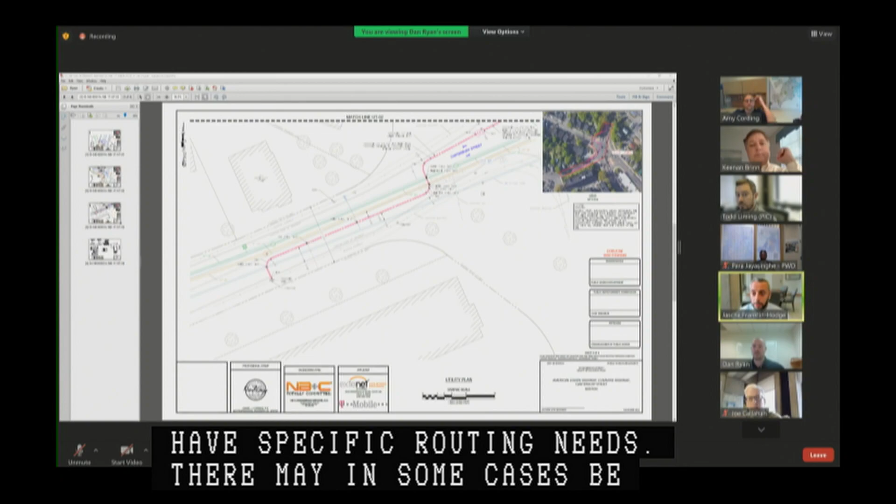Just to extend that slightly, I think it would be appreciated that you look at specific routing needs. There may, in some cases, be more than one way to get from A to B. Looking at the potential routes in context of the current condition of the roadway, with an eye towards minimizing the amount of cutting in roadways that have otherwise not been cut since they were last resurfaced, would be very much appreciated as part of this planning process.

Absolutely. This won't be a fun intersection to work with. You're going to cut our loops, so you should be very clear about where they are and how to fix them, because you're not going to want to be out here for very long. Understood.

Any additional questions or comments from members of the commission? Any questions or comments from PIC staff or members of the public? No, none. All right, are you prepared to come back for this in two weeks? Yes, we will. Excellent. All right, we will see you then.

Thank you. Moving on to our next item, new business number 10, South Street, West Roxbury, granted location on a petition by Extenet Systems Incorporated. Would the petitioners please reintroduce themselves and walk us through this proposal?

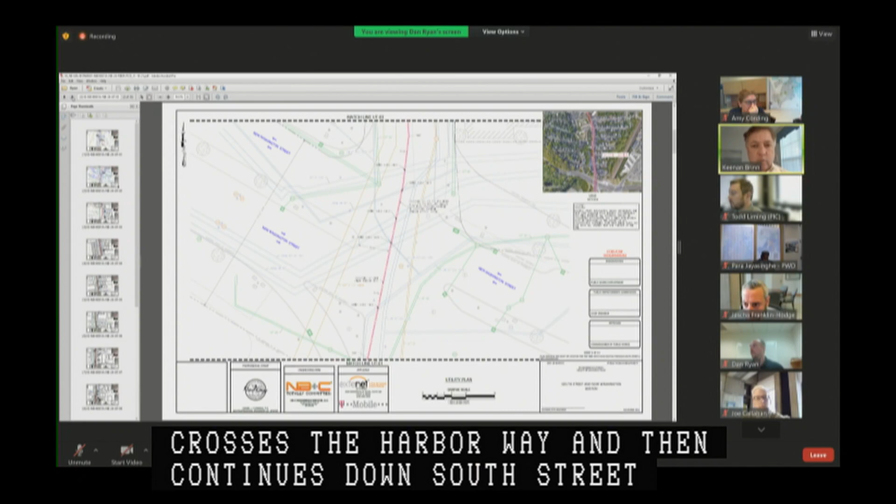Yeah, certainly. My name is Keenan Brin. I'm here on behalf of Extenet Systems. We are proposing and petitioning for a fiber duct run in the city of Boston over in the Jamaica Plain area involving mainly South Street. This fiber run is relatively lengthy, 1,933 feet. It starts on South Street, crosses the Arborway, and then continues down South Street. There's another one of these spurs that leads off to a pole on South Street for a very short run.

And then there's a kind of a second spur near Jamaica Street, but the fiber line actually continues on South Street. It terminates on South Street just beyond Jamaica Street.

We're not aware of any other MWRA permits or anything of that nature for this, but in terms of the handicap requirements, we're prepared to follow those. Again, like the others, we expect we can cover 150 feet per day and restore that on a daily basis. And the last item, obviously, the shadow ducting, we're prepared to comply with that whatever way the city sees fit. I hope I didn't go too quickly on that, but that's a fairly straightforward run.

If you have any other questions or concerns similar to the other ones, please let us know. So a question - I believe this route proposed will traverse the intersection of South Street and the Arborway, and in doing so is going to cut across some existing, relatively recently installed pedestrian and bike facilities, including striped and colored bike crossing lanes going across South Street.

Can you speak to how you expect to do restoration of those pavement markings that are likely to be disrupted by this? I did notice that when I was out there. Dan, do we have any kind of specifications about the bike markings, the lanes, and how we're going to recreate that on a traffic management plan or something?

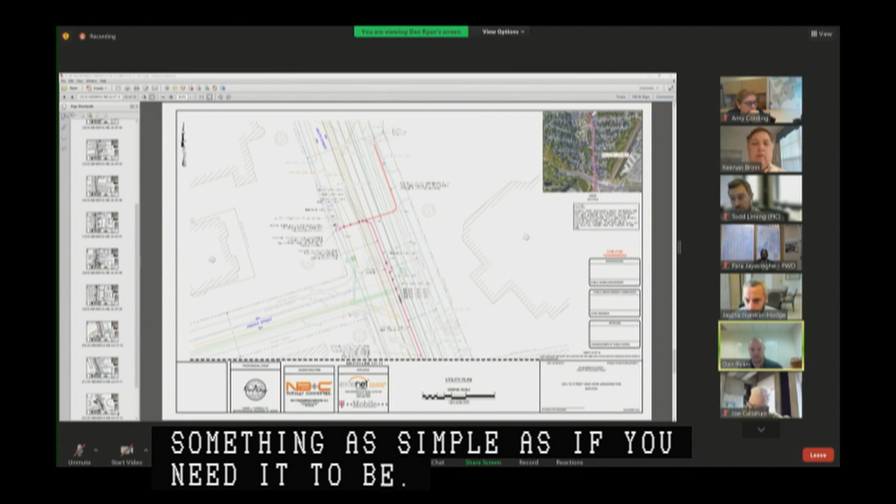Okay, I want to make sure that as this work takes place, the specific markings for both pedestrian and bicycle facilities - their safety infrastructure, designed very specifically to produce safe crossings for vulnerable road users at a major intersection - are protected. I want to make sure there's a commitment on the part of Extenet to restore the markings to the current or intended condition in a robust way, because we have seen a history of some of these pavement markings not being fully restored, and that raises safety concerns for the city. So is that a commitment you're comfortable making?

Yeah, no, they're fully aware that anytime they cut up a crosswalk or a bike lane or really any lane marking on the road, it's their job and responsibility to restore it back to the previous condition it was in before they opened it up. Okay, thank you. Any other questions?

What's the expected duration for something like that, Dan? Was that something they would have done within 48 hours or the same day? That's really a question that the construction team would have to answer, but we can get that answer.

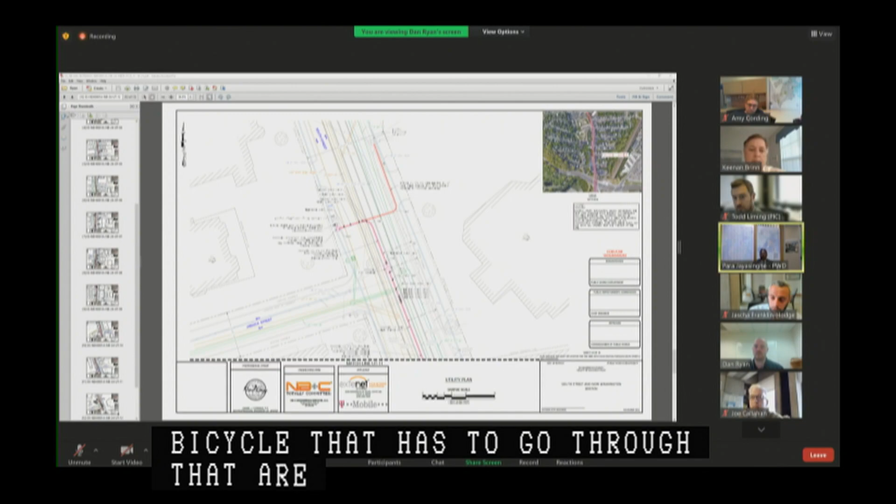Keenan, Dan, not to labor the point, but to echo the chair's comments: especially when your cuts cross bike lanes, the settlement issues from compaction have consequences that are massively amplified when a bicycle has to go through that area versus a car. You all need to understand how the city's roadways are being repurposed for a very vulnerable traveler. Cars don't care, and pedestrians won't fall just from a settle, but a bicycle will veer course and get into a very awkward moment. So your settlements are a huge concern for me and my team.

The compaction has to be done properly when going through a bicycle track, and you need to do follow-up work too. This isn't just you, it's a system-wide issue where subsequent freeze-thaw cycles create compaction problems that are very troublesome. It bothers me to the point where we may have to re-question interruptions or intrusions into the city's right of way. You can help us weather that storm by impressing upon your contractors, because we don't have enough staff to chase you folks down to do the QC/QA. So help me out on that front, Dan.

Can you? Absolutely. We'll make sure the message is loud and clear, especially for the bike lanes. We obviously don't want any uneven surfaces after we leave the area, causing people to trip and fall off the bike or anything like that. We want to make sure it's restored to the condition it was in prior to opening.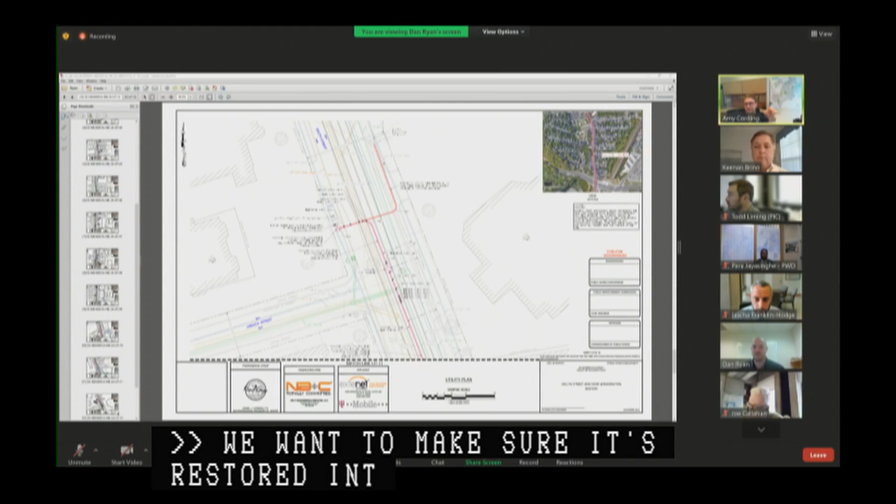Some forethought goes a long way, right? If you look at what's above ground and stay out of it, stay out of turn lanes, you don't have to repaint legends and stuff like that. If you look at what's above there, you can pick a route that will cause you minimal heartache when it comes time for restoration. Traffic loops are 100% included in that.

Any additional questions or comments from the commissioners?

Any questions or comments from PIC staff or members of the public? No, none. All right, would you like to be on the agenda again in two weeks? Absolutely, yes, thanks. All right, we will see you there.

Moving on to new business, item 11: Washington Street, Poplar Street, Murray Hill Road, West Roxbury, granted locations, and a set of petitions by ExteNet Systems Incorporated. Would the presenters please reintroduce themselves and walk us through this set of work?

Happy to. Again, Keenan Brin, representing ExteNet Systems for their fiber duct petition. I'm here with Dan Ryan, who's providing engineering support. I'll proceed now with the last petition we have in front of you. This particular petition actually involves two different fiber runs. We initially submitted these as two different applications, but it's really one continuous run. I think, Dan, you have NB20 up first, right?

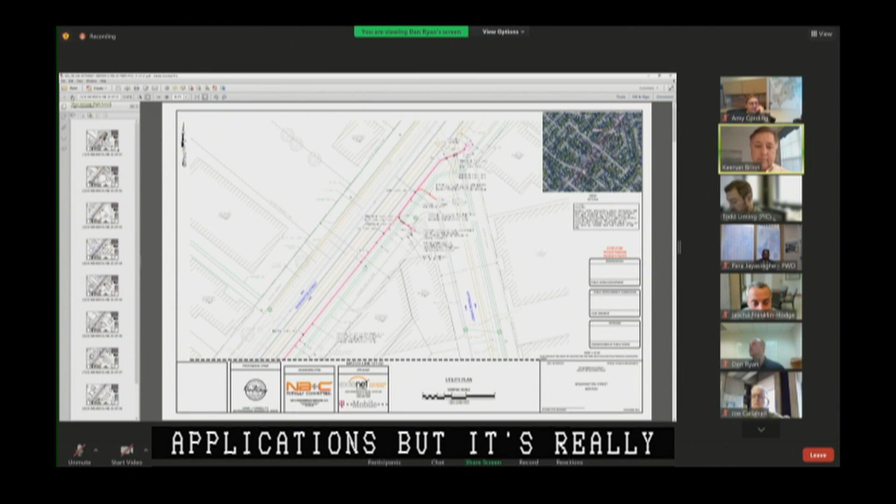Yes, so this particular run starts on Washington Street near Kittredge, comes down, and right away there are a couple of small spurs off that run over to a couple of poles that we're connecting to. Other than that, it's a pretty straight run down Washington Street. This one covers about 1,639 feet, kind of similar to some of those other runs on Hyde Park Avenue, Washington Street. I don't see any particular issues here.

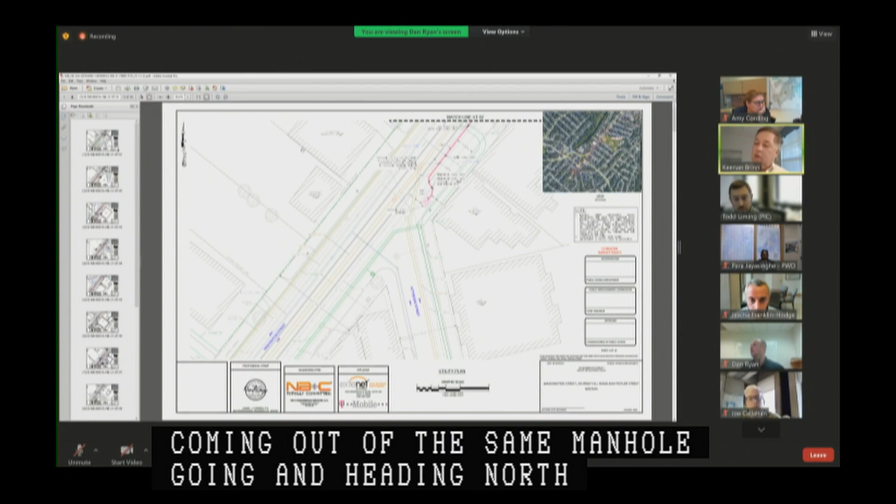With MWRA permits or things like that, I didn't hear anything from city agencies regarding this either, but we're certainly prepared to deal with any handicap issues. And again, the bike lanes and traffic management plans will certainly provide for that. This particular run, like the others, expects the same construction schedule, 150 feet per day, and we'll install the shadow duct as required by the city and whatever else they may want to see. So, coming out of the same manhole, heading north, there was a separate fiber run, but it's continuous along Washington Street. This one starts at that same manhole.

It covers heading north and goes about 2,567 feet on Washington Street. It actually runs down Poplar and continues for a small stretch there, probably 50 or 75 feet, and then continues on Washington Street. There's actually a second spur farther along Murray Hill Road, and again it probably goes down there about 50 to 75 feet, continuing on Washington Street to the end. That's the continual length of the project.

The length of the project is 1,639 feet heading south, and then heading north it's 2,567 feet. This whole continuous run is about 4,200 feet linear.

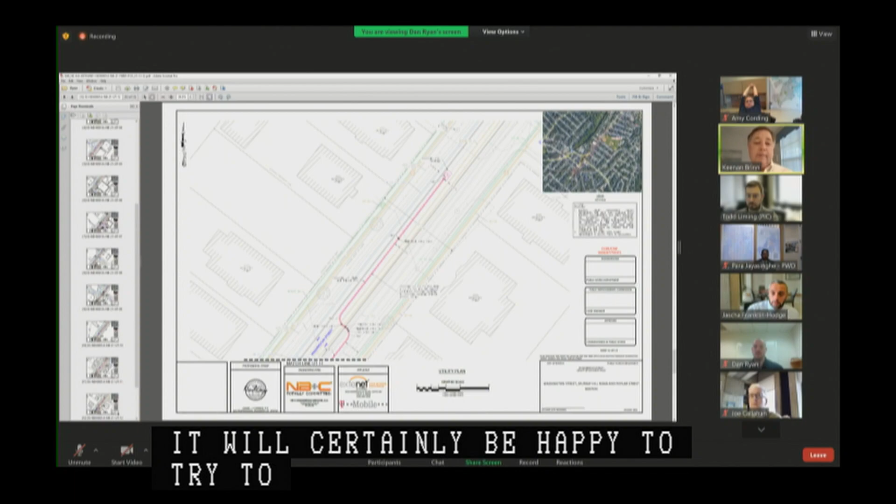We'd be prepared to do whatever shadow ducting is necessary, and it's our anticipation that we'd be able to cover 150 feet a day and restore that on a daily basis. If you have any specific concerns about the bike lanes or crosswalks, we'll certainly be happy to try to address those between now and the next couple of weeks. Same goes for the handicap access. We'll be prepared to deal with that as well.

If you have any questions regarding this run on Washington Street, we can take those now. I'll appreciate that. I'll start by noting how long of a run this is. This will really disrupt almost the entire length of Washington Street within this area around Roslindale. As you come back next week, or in two weeks, whenever you're back on the agenda, I think it would be helpful to focus on those pavement markings that are going to be impacted by this.

There's a dedicated bus lane that has quite a bit of writing and other red thermoplastic or red treatment of some kind. I'm not sure what the material is along the northbound stretch of Washington Street. There are innumerable crosswalks on here, so this has the potential to be extraordinarily impactful to travel on this street and safety on this street if restoration is not done in an exceptional manner.

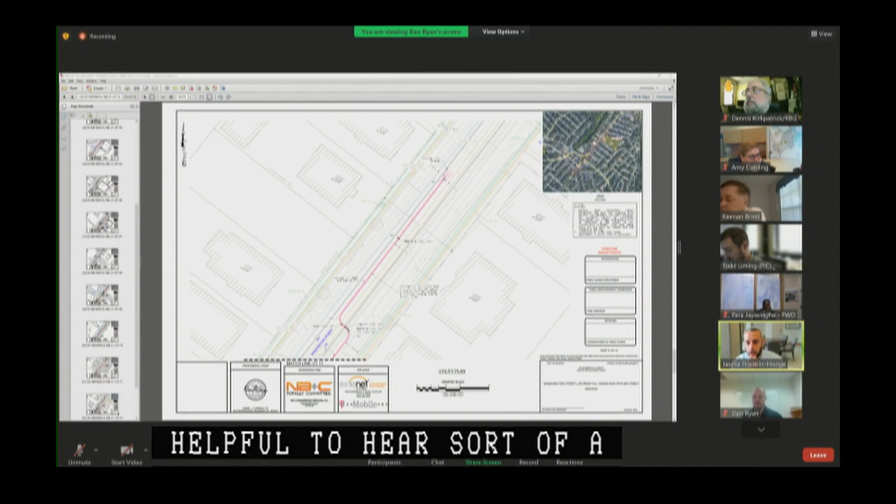I think it would be helpful to hear a little more detail as you look at the totality of the corridor you're proposing to trench, what pavement markings you anticipate being impacted, so that we can have a very clear commitment quantified in terms of your expectations for restoration of those markings as this project traverses. There's a lot here we care deeply about, as with every street, but the length of this makes it particularly impactful. I understood that as 4,200 feet.

We had actually submitted these as two different projects initially, roughly 2,000 feet each or somewhere in that vicinity. I don't know if we could break it up and do them at separate times, but I'm not sure how much that matters. I think the concern is less about the times and more that if not restored exceptionally well, the scope of impact because of the length of this total project is extraordinary. So really the focus is that commitment, that understanding of what you will be disrupting on the surface, and as much clarity as you can offer as to exactly how those disruptions will be restored.

At the conclusion of the work, in particular with that focus on safety, pavement markings, bus lanes, things of that sort. Yeah, I did drive this stretch of road, and I can appreciate the amount of pedestrian, bus, and vehicular traffic. So we'll try to have some answers for you.

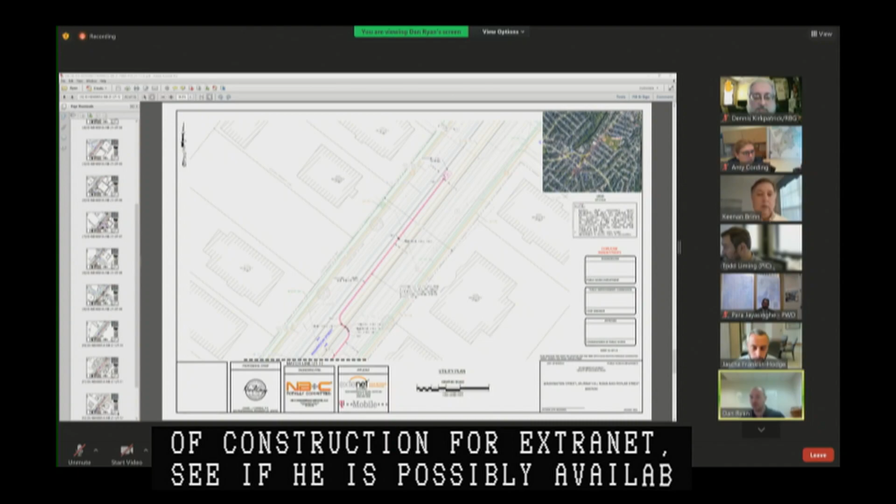Hi, Jascha. Just in reference to that, I can't promise I'll be able to get the correct person on the call for the hearing due to his time constraints. But what I will do is reach out to the head of construction for Extenet to see if he's possibly available to come on, so you can hear directly from him about his restoration efforts, if that'll make you feel a little more comfortable.

I think that would be helpful to hear, really in the context of all of these projects. These nearly mile-long runs are particularly concerning, but an explanation of restoration plans would be appreciated. Understood.

Other commissioners, comments, questions? I did just want to call out that we do have a record of 2 accessible on-street parking spaces along this run, and I think they are especially sensitive given the location in Roslindale Square and along the stretch of Washington. So we just wanted to point that out for the record. Thank you.

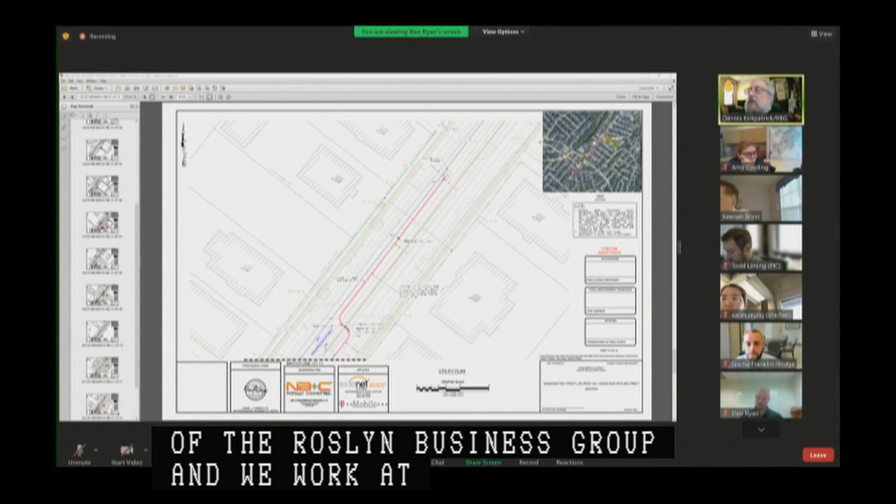I am a member of the board of directors of the Roslindale Business Group, and we work at a grassroots level with individual businesses. Through the pandemic and some infrastructure changes to Roslindale Square with respect to bus stops and parking and a few other things, our business community throughout that stretch is having sustainability issues.

So it'll be important that we stay in the loop with respect to this construction once it is started. I understand the value of this, but there may be days when certain merchants will need to change their delivery schedules. Some of them may even decide not to open on a particular day if they know that you're going to be in the area. So I think this is important.

I can also extend information to at least 4 area neighborhood organizations. And if we keep them in the loop, that might limit the number of complaints about non-notified construction to the 311 line at the City of Boston. I think that way, if we keep everybody in the loop, everything will go that much more smoothly.

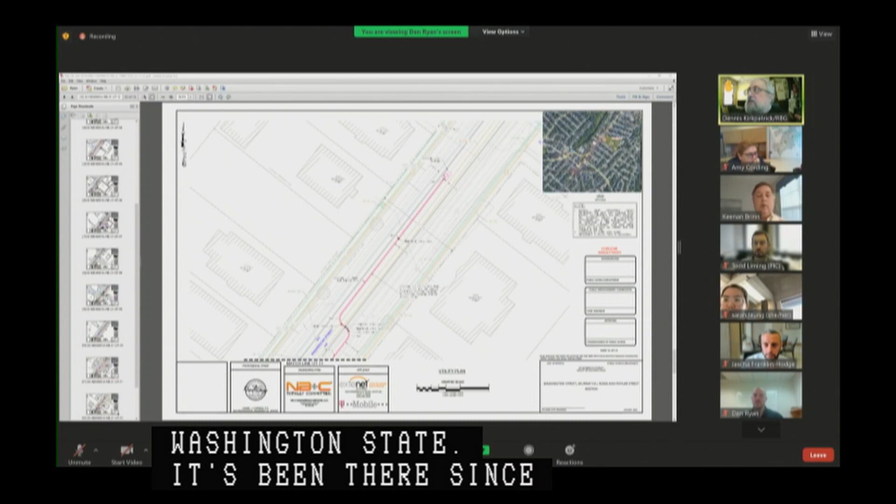One last comment - I happen to know that Verizon has an existing major high-speed OC trunk line buried in Washington Street. It's been there since at least 2006. I know this because there's a connection into the community center building that's been there for at least that long, before FiOS came out. So I'm sure your engineers will have that on the maps, but worth mentioning in public.

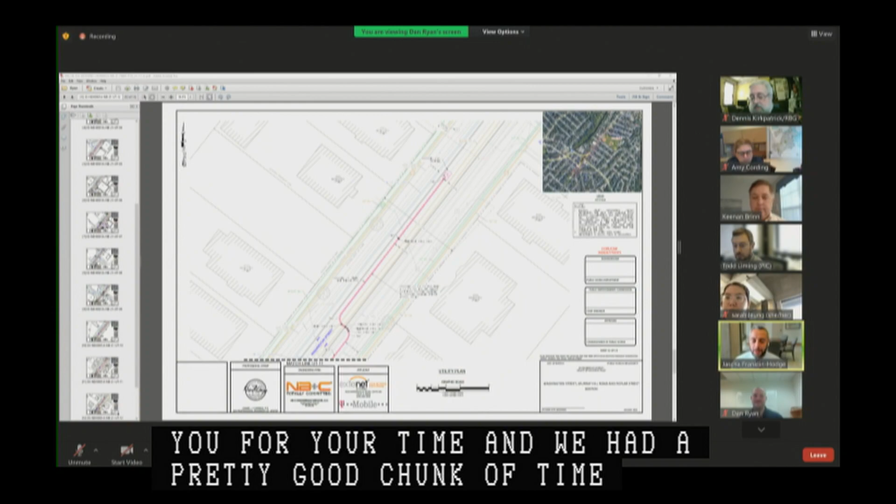Yes, yes. All right, so moving on to our last 2, we have new business item number 13, which is 93 Devon Street... I'm sorry, I skipped ahead. New business item number 12, 17 Caldwell Street, Maffa Way, Charlestown, granted location on a petition by Verizon New England Incorporated. Would the proponents please introduce themselves, their affiliations, and the scope of the work being proposed?

Yes, good morning. My name is Ross Bilodeau. I'm representing Verizon New England this morning. How are you? Doing well, thank you for joining us. Okay, no problem. Do I have permission to share my screen here?

Yes. And before you do, I just want to check in with the Commissioner from the Disabilities Commission. Did you have an item we needed to address?

All right. Yes, unfortunately, Chairperson Hodge, I did have a conflict, a prior conflict at noon, and I will have to hop off for this business item and the rest of the agenda.

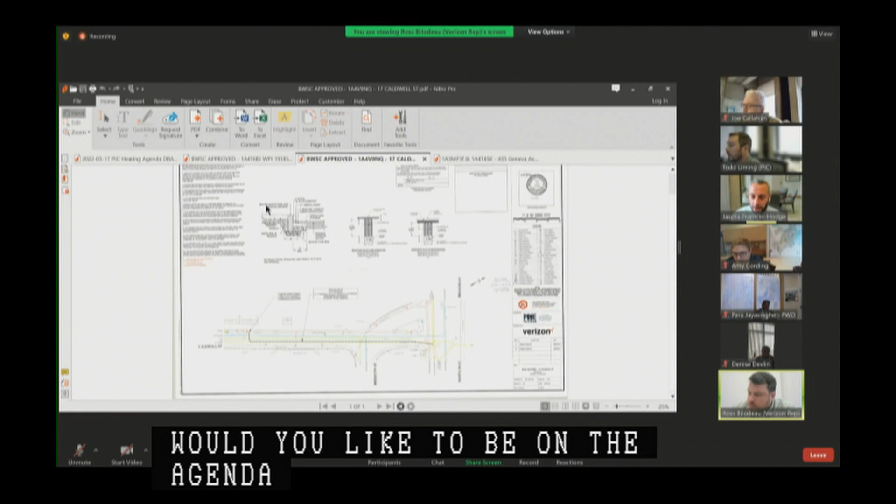Moving on now to new business item number 13, 93 Devon Street, Normandy Street, Dorchester, granted location on a petition by Verizon New England Incorporated. Would the petitioners please reintroduce themselves, their affiliations, and walk us through what is being proposed?

Sure. Again, my name is Ross Bilodeau, representing Verizon New England. I have my plan in front of you. This is for 422 feet of new conduit from an existing pole 8 in front of 71 Devon Street to another existing handhole, which is located in front of number 93 Devon Street. Same idea, looking to provide some new services, fiber optic, extend from our existing network to that location.

So let me bring that up. So you can see existing pole 8 here, coming down Normandy Street a little bit up to our existing handhole in front of 91 and 93 Devon Street.

Thank you. Any questions or comments from the commission? Any questions or comments from PIC staff or members of the public? No, all set.

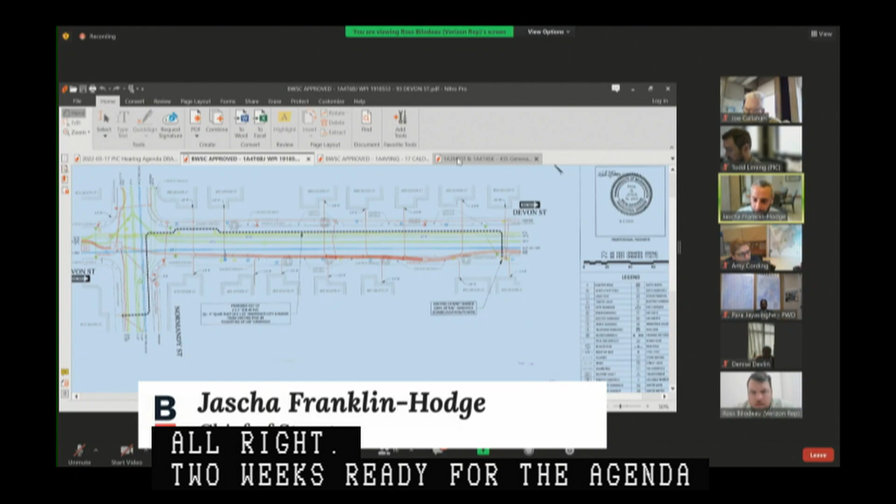And our final new business item, 435 to 465 Geneva Avenue, Dorchester, granted location on a petition by Verizon New England Incorporated. Petitioner, please reintroduce yourself and your affiliation and walk us through this work. Sure. Once again, Ross Bilodeau, representing Verizon New England.

This petition's a little different here. We're looking to place 437 feet of new conduit from an existing manhole, route number 11, manhole number 79, which is located at 455 Geneva Avenue. It's actually going to 2 existing handholes, one on each side of the street by 451 Geneva Avenue. Again, this one will also include a city shadow duct.

So on our first plan here, you can see us coming out of the existing manhole number 79, up Geneva Avenue, continuing across from Bloomfield Street. And like I described, coming across to one handhole and continuing to the second handhole. I guess this was originally 2 petitions, but you had asked us to combine them at some point. At a point in time I was not privy to, to be honest with you. But here we are again, combining these 2 petitions into one project.

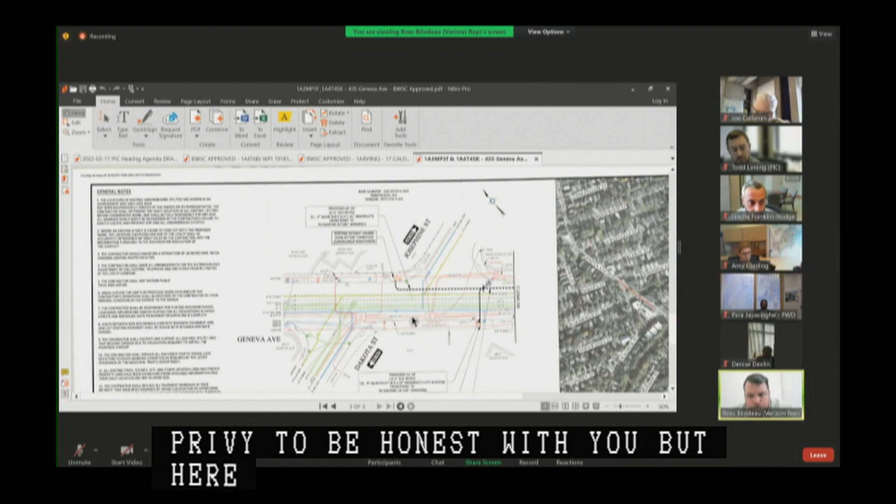Questions or comments from members of the commission? Questions or comments from PIC staff and members of the public? Just one thing, I don't know that I've seen water and sewer site plan approval for this revised run. I think they have approved the run to one node and then a separate run to another node, but since you've combined these, I'd like you to double check with water and sewer that they're okay with this run specifically in the next 2 weeks if possible.

Okay, sure. I believe they have reviewed this and approved it. I'll make sure that is set in stone. Okay, yeah. The only plan that I've seen just has the one, so just give me the updated plan, please. Understood. Thank you.